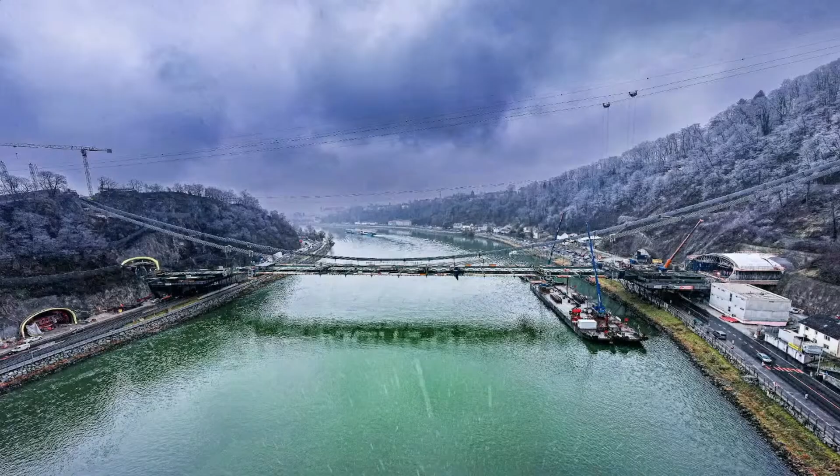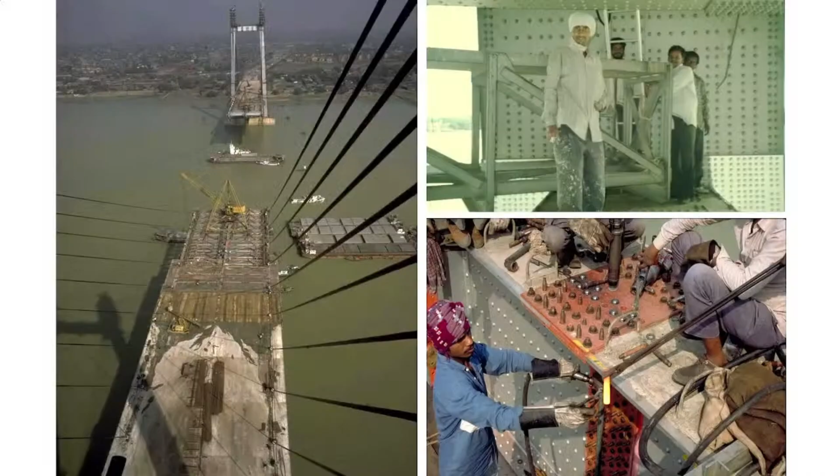Anyways, just to give you some ideas - one of the real roots of our office is actually in India. Perhaps you know this bridge, I've talked about it before. This is the second Hooghly Bridge in Kolkata, the Vidyasagar Setu, designed in the 80s, and at that time it was the longest cable-stayed bridge in the world. It took a long time to build. By the time it was built, it was not the longest anymore, but it was the first cable-stayed bridge with a composite deck. It showed the power of composite sections, and it was built with local material, indigenously, because at that time there was not really weldable steel in Kolkata. There was not a lot of experience with high-strength friction grip bolts, but there was experience with riveting. So the entire bridge was built - it's a world record long-span composite deck cable-stayed bridge, and all riveted. This is possible with local people, local workforce, local material, and local construction methods.

Is there a pointer here? I don't know how the pointer works here. But anyways, you can see it. No, I wanted a pointer that I can use. No, don't worry, let me go back.

Here we go - so this is local materials and riveting. I think we as engineers have to be flexible and find out what is available and what can be done. Riveting is actually a very good way of connecting steel, even though today it's perhaps too expensive. The bridge is still standing, and it shows how slender cable-stayed bridges can be, how resource-saving they can be. It's a 450-meter deck with only a 1.50 meter height.

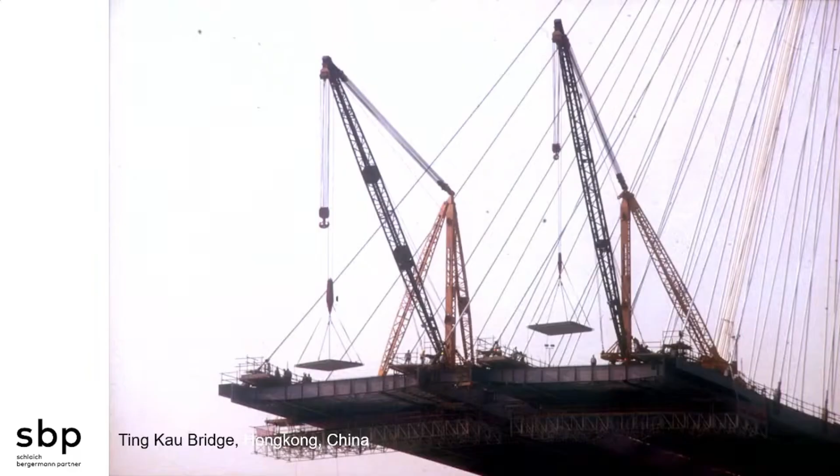This bridge again is done with composite deck. It's one of the few multi-span cable-stayed bridges, with a 450 meter span and about 1.50 meter deck height. The difference from the bridge we saw before is that here we worked with precast concrete slabs. You see a steel grid, and on the steel grid there's a concrete slab. I think this is a very fast way of building such bridges because the steel grids are comparatively light. They can be prefabricated and put on site very quickly, and then you have the sheltering concrete slab that protects the steelwork and takes the horizontal cable forces very nicely. But if you work with in situ concrete, these horizontal cable forces on the young concrete cause a lot of creep, and this creep then overloads the steel very easily. So for the next bridge we chose prefabricated concrete panels, because they're older, so there's less creep and less loading on the steel.

So this is the example of the Hong Kong bridge, and because it's a multi-span bridge, you can see you have to stabilize the main pylon. Therefore there are these longitudinal stabilizing cables, because the central mast has no backstays, and usually cable-stayed bridges do have these backstays, and they need them.

Then this story continues. We came back to India. Perhaps you know this bridge, the Signature Bridge in New Delhi, which is called that because at the time the chief minister wanted an icon, a signature bridge. When I hear this word, I get goosebumps, because usually I'm trained to do good bridges, not crazy stuff, and 'signature' always sounds a bit like crazy stuff.

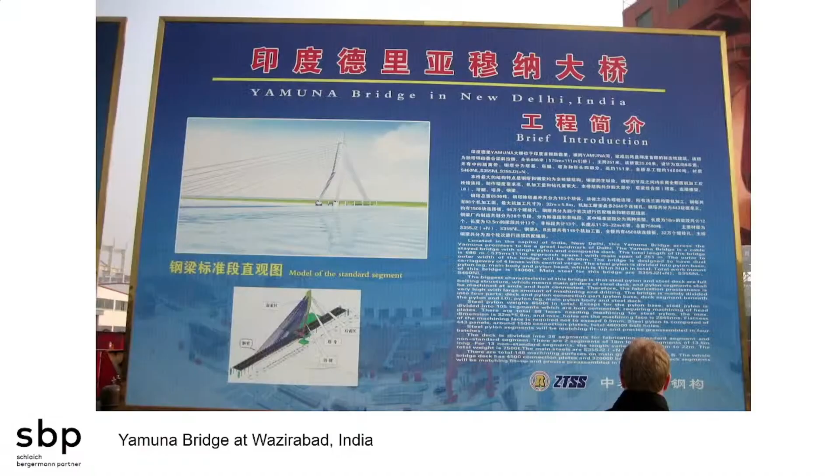I'll give you one example of what that means. If we look at the connection where the mast meets the deck, this is a rather big element that needed to be prefabricated, meaning you have to move 400 tons of steel halfway around the globe. So this was prefabricated around Shanghai, plates welded together, and then you see the little holes bolted to longitudinal and transverse girders. It had to be coated, and they had to bring it from Shanghai all the way to New Delhi.

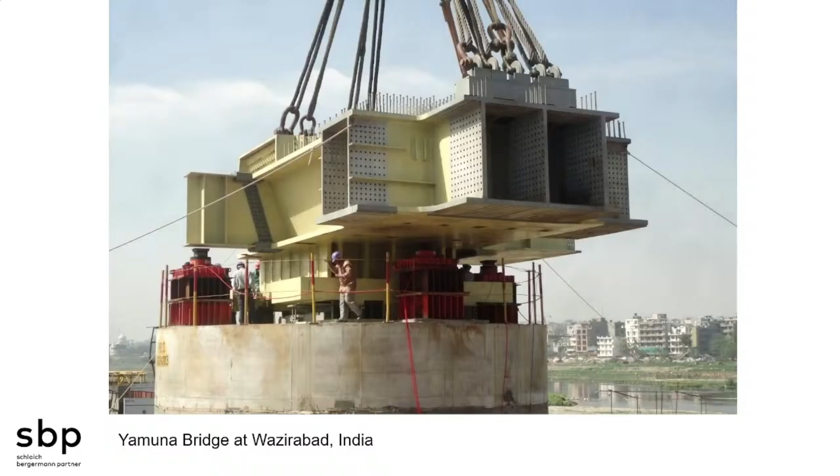You see this plate here, a 250 millimeter plate. We thought that was not possible. We had designed it with lots of 50 millimeter plates, but the Chinese said no problem, we can weld 250 millimeter steel plates. So the choice of material also has to do with the dimension of the materials. What can you actually do? What can you weld? What can you connect? What can you transport? This is just this little piece here.

And the entire bridge was then built together like that. Because think, if you see such a mast, such a pylon, how would you construct it? What's the structural detail behind it? Is it hollow with load-bearing outer walls, or is there a structure inside? If you look at the Statue of Liberty, which was actually designed by Eiffel of the Eiffel Tower, the Statue of Liberty is a steel truss, only covered by non-load-bearing steel plates.

And here it's the other way around. What you see is load-bearing - this is material decisions and structural decisions. Does the material I have, is it able to carry the loads? And then you see these horizontal lines, almost horizontal lines - this is where individual elements were connected. It's basically a big Lego thing, large elements were bolted together. You see the last one on top, so this would be the size of one of these elements.

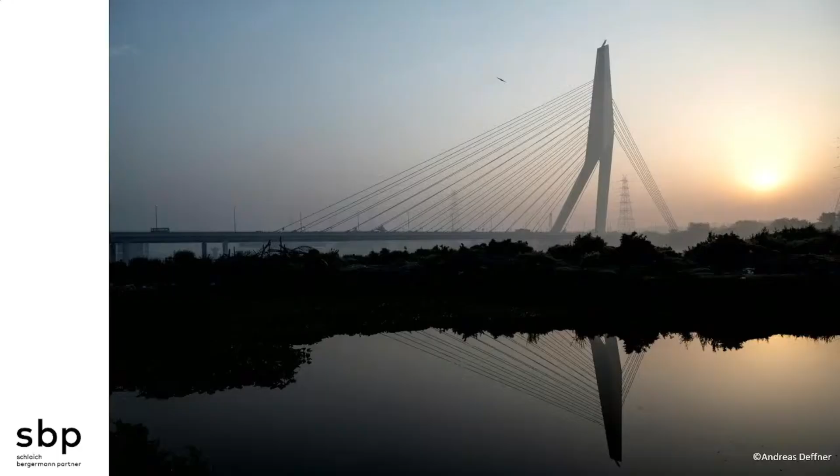So the bridge is standing nicely, it's fulfilling its task as far as traffic goes. But it's a bit strange - why have a 250-meter, one single pylon cable-stayed bridge in such an area where there's no water really? Because this is basically a 500-meter bridge as if it had two masts.

So the initial idea was that all this would be somehow dammed, that there was a lake, a huge lake, and that would become a big park with a lake. So they call it signature bridge, and whenever I'm in New Delhi, I say yes, but the signature was the promise to make a park, and you have not really fulfilled your promise yet, because this bridge only makes sense if there's a lake and a big park. So I really hope that one day this bridge will get its lake and make sense really.

But it's a nice composite deck, and it really relieves traffic in New Delhi. Not all bridges need to be with composite decks, obviously.

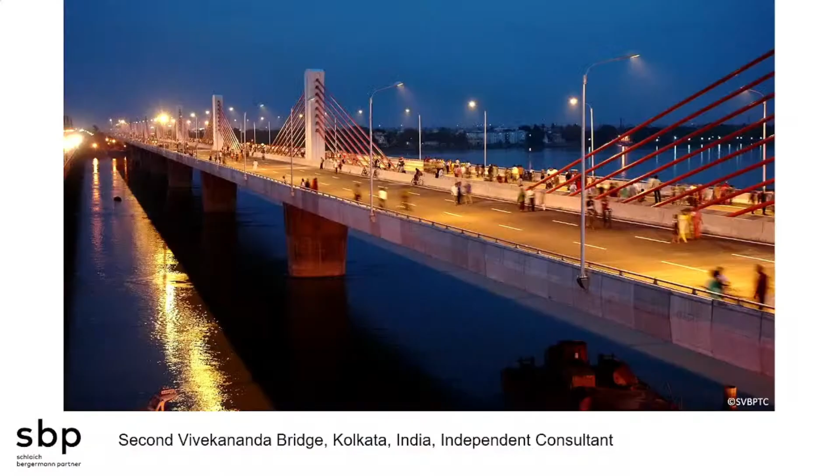And here this is an example of an all-concrete bridge, the multi-span extradosed bridge, the second Vivekananda bridge in Kolkata, designed by Parsons and IBT, together with CES, built by L&T - all these abbreviations.

I found it very interesting to understand how extradosed bridges work, because I come from the field of cable-stayed bridges, and if you see such a bridge as a cable-stayed guy, you say that makes no sense at all. These very low pylons, these very inclined cables, the forces in the cables are way too high. Why do you make such a high deck if you could make it as slender as we have seen before? The backstays are missing, and this is all crazy.

It makes no sense - but they are not cable-stayed bridges, and this is why they do make sense for spans between, say, 100 and 200 meters. Basically, they are only box girder bridges where the pre-tensioning or post-tensioning has somehow grown out at the supports. And since the cables are very shallow, the masts are very low, they work mainly to carry dead load, also because there's no backstays. The masts are comparatively flexible, and since the deck is very heavy, the deck is basically taking all the live load. So these cables that you see, they are mainly for dead load.

They're basically nothing but post-tensioning, so the load-bearing behavior is completely different. And since they are mainly for dead load and don't get big stress changes because of live load, there's less fatigue problems. And if there's less fatigue problems, you can use cheaper steel and cheaper anchorages. Therefore, extradosed bridges are very, very attractive, very economic for smaller spans.

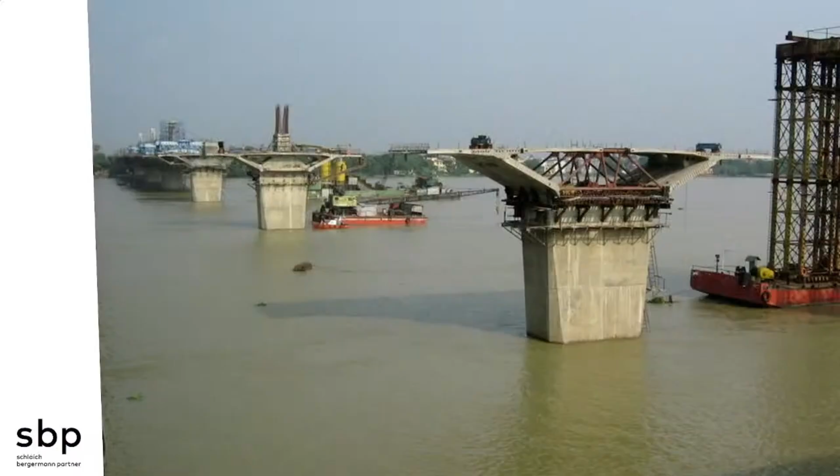So this is what I learned on site. We were the independent consultants, and I learned so much about extradosed bridges, especially in India with all these well foundations. Well foundations are another very Indian thing - you have these big rivers and the scour and the sand, and that all calls for these well and caisson foundations that you would not use so often in other parts of the world.

So the well foundations cannot be seen, they are down here, up to 50 meters. Then you have this concrete pier, and you see the first segment still in steel, again composite, steel and concrete. Then back there, you see it's all cast with concrete and all monolithic. So this is already an example of an integral bridge without bearings and joints, at least at the piers.

And this is one of the segments, D6 segments - D6 because it's 6 lanes. There's all kinds of shear keys to connect the deck segments. Here you see this hole where the cables are installed.

So, very typical, and something that you would not build in Germany, for example. In Germany, such bridges are not allowed because in Germany people say in these joints there's trouble. We have a lot of de-icing salt in Germany, and the salt water runs into the joints, and then you get corrosion in the pre-stressing. So in Germany, it would be very hard to build such a bridge, while in other parts of the world, you see them all the time.

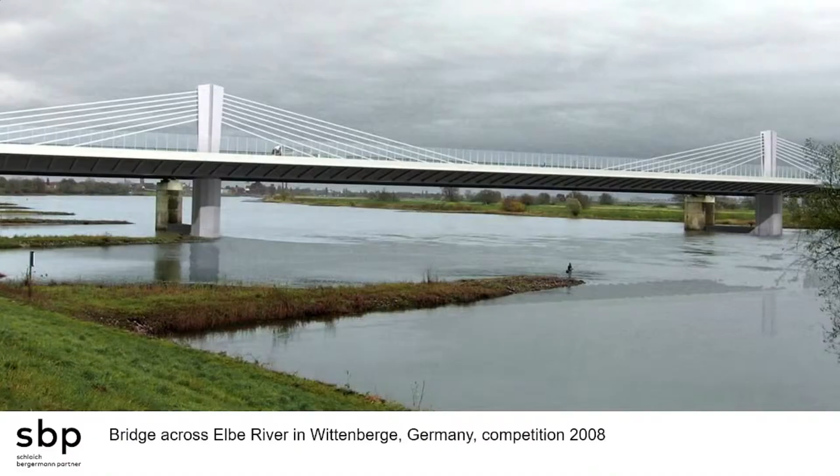Extradosed bridges are also something quite Indian. There's a lot of extradosed bridges here in India, while in Germany there's not so many yet. This was one proposal that we did for a German Autobahn highway, but it did not get built. Still, we got all the extradosed guys in the world, the ones that I know at least, together. There's Mr. Sankaralingam, whom you perhaps know from L&T, and at fib we wrote one of these fib books on extradosed bridges.

So we collected all the knowledge, that international knowledge that is available, in this book. Thank you very much.

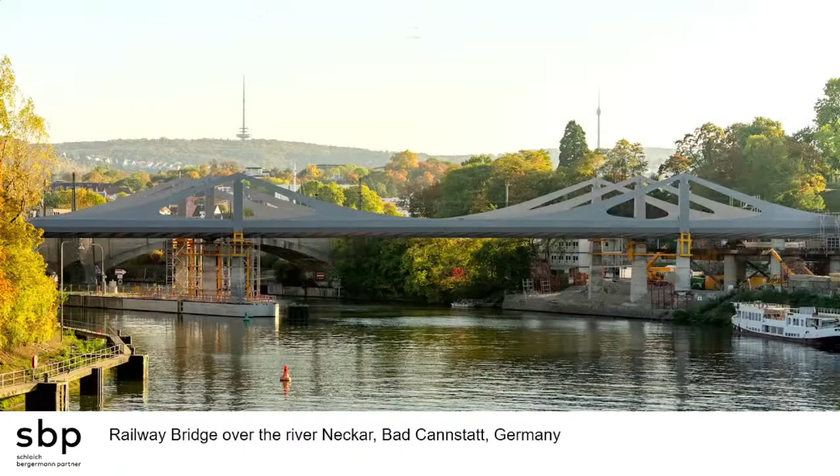So we have talked about cable stayed bridges and extradosed bridges and a little bit about the differences, but this doesn't necessarily have to be a steel cable. It can also be a steel plate. So this is a railway bridge in Stuttgart, Germany, that follows the same principle. You can call it an extradosed bridge, but rather than having expensive cables, it's just heavy steel plates that at the same time form a bit of acoustic protection.

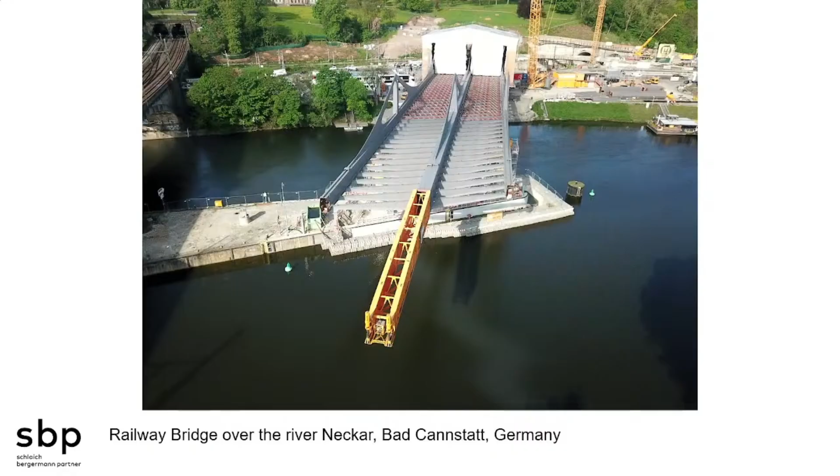And this bridge was just recently finished. It's again a composite deck. You see the tent back there. This is where the deck was prepared, pre-welded, and then it was pushed segment-wise across the river. And you see the longitudinal girders and the cross girders, and then the concrete was cast on top.

So even railroad bridges can be done this way. And underneath the deck, you see this hanging footbridge. So at the same time, it is protecting the pedestrians that at the same time cross the river Neckar in Germany.

This was the first part. How much time do I have left? You have about 10 minutes. 10 minutes, okay, then I have to speed up a little bit.

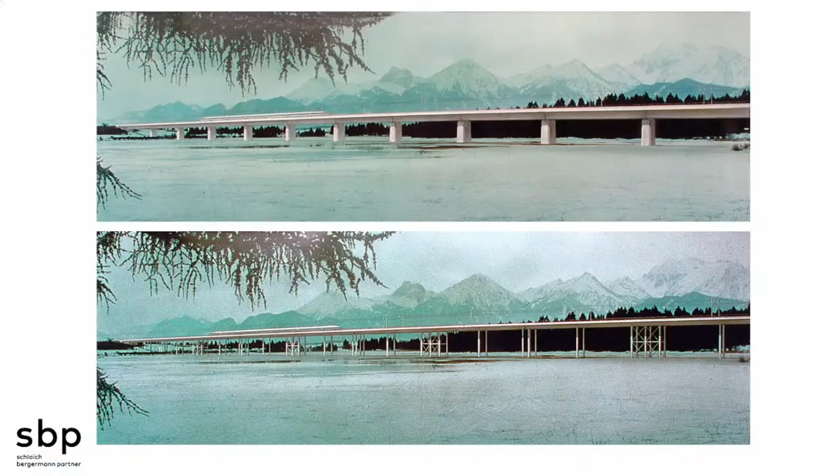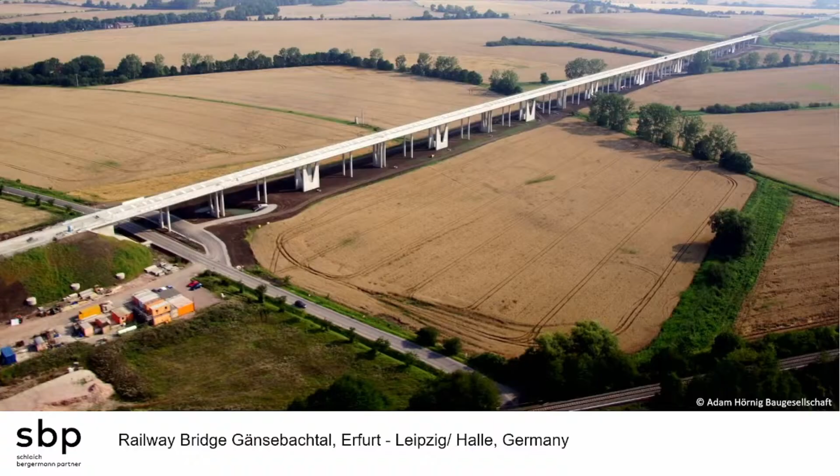So integral bridges. In Germany, usually you do bridges with lots of joints and lots of bearings, and already my father, whom you have met in the beginning, said, look, why not make integral bridges with very slender decks and very small spans. The smaller the span, the lower the loads. You can do it with very slender piers. And this is what we have actually designed for German railways. German railways is rather conservative, but they have accepted integral bridges. So here you see very slender piers, very slender support structures with the starter reinforcement, and everything was concreted together as an integral bridge. So no bearings, no joints, or very few joints, and that is, I think, a very elegant way of building robust and low maintenance bridges all over the world.

But in this case, yes, the movement goes all the way into the ground, so you have to also do pile-soil interaction. Calculation becomes very important.

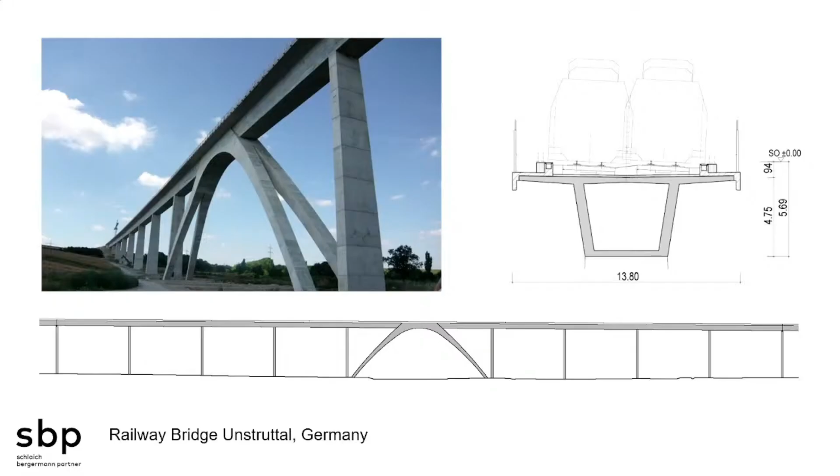And this is also my claim: you have to spend a lot of brain as an engineer, and the contractor and the client are the ones who save money, so they should pay us well. If you don't pay your engineer good fees, he has no time to do stuff like that.

So this is the bridge, and you see even at the joint there are no bearings, because there are two walls on the pier, and these walls are monolithically connected to the deck.

We applied the same system to highway bridges. You can see it's a very humble highway bridge, still small spans, only 1.20 meters height, and very slender piers of high strength concrete that can take care of all the movement. So this is a 600 to 700 meter integral bridge without any bearings or joints, and they are very cost efficient, because there are no expensive bearings and no expensive joints.

But yes, you have to sometimes construct the piers and stress them to the side, then cast the concrete, and then with time they go straight due to creep and shrinkage. You have to do some fancy construction acrobatics sometimes if you really want to do it successfully.

So you see how slender these piers are for a rather normal bridge, but the contractor saved a lot of money and the world saved a lot of resources.

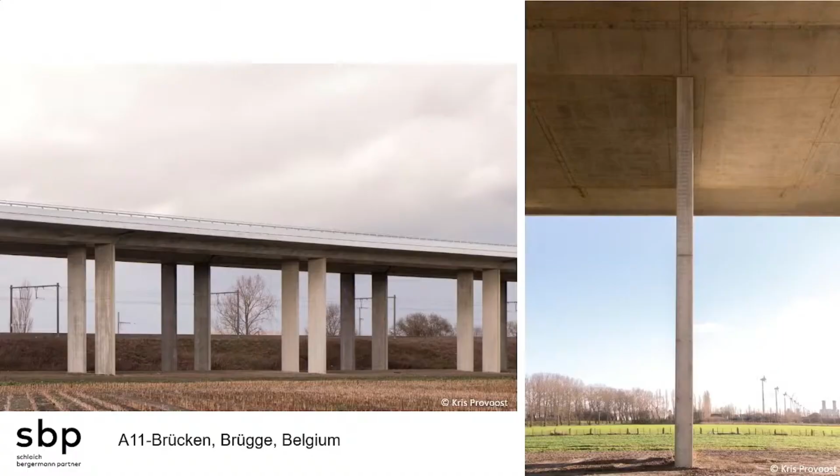So I had several PhD students working in the field of carbon fiber cables. We have developed anchorages for carbon fibers. I could talk for hours, but this is not the time right now. I'll just tell you, don't break them. Make sure that this brittle material doesn't break, because you end up with a lot of fibers and a lot of black powder after a big bang.

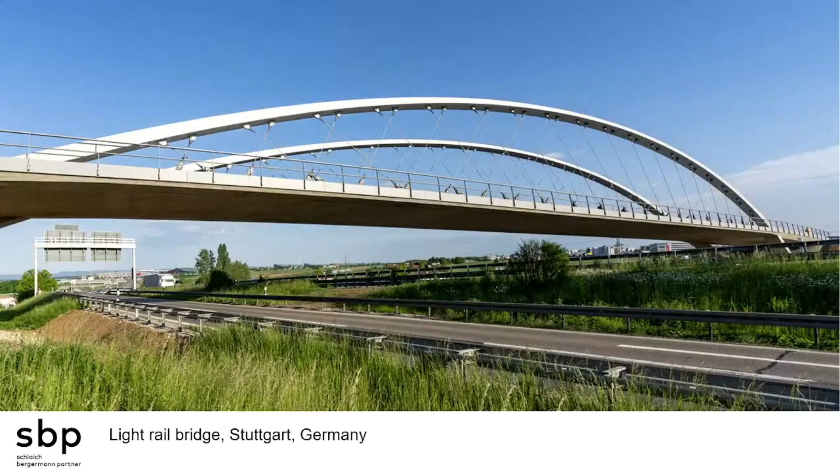But this research has led to bridges like that. This is a network arch bridge where you get a lot of stress changes due to live load, and if you would make the hangers in steel, they would have big diameters because of fatigue design, while with carbon fiber you can end up with very slender hangers.

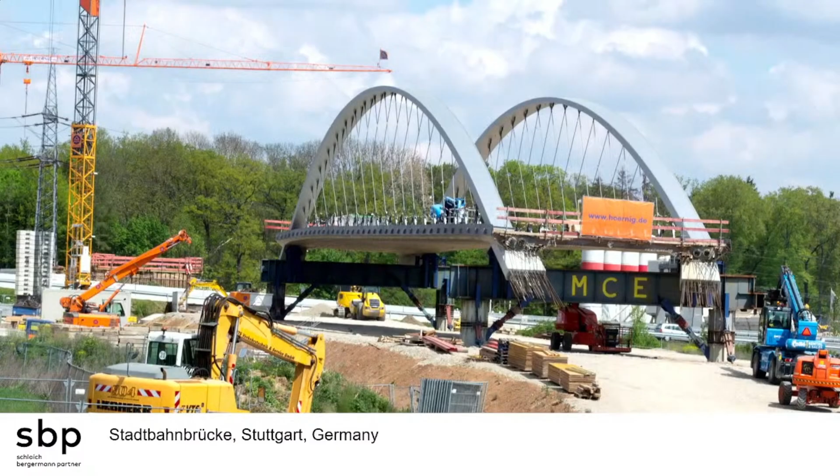As you can see here, the entire bridge was prefabricated. This is the carbon fiber anchorages, and here you can see how slender these hangers are in carbon fiber.

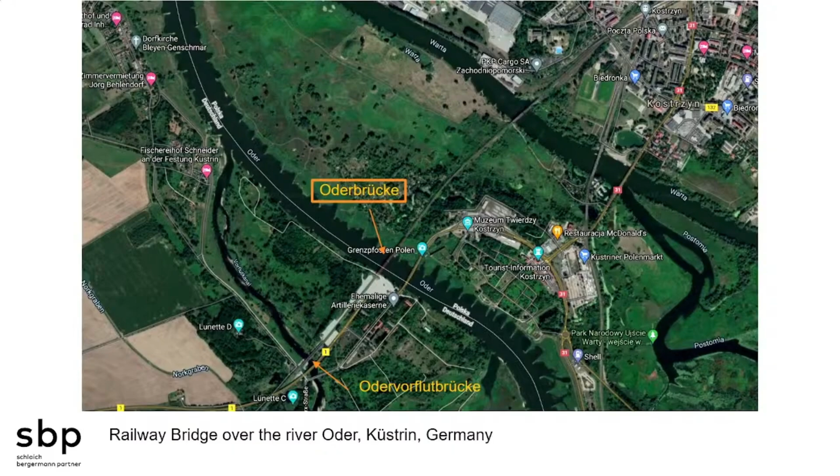There's another bridge I quickly want to show you. This is the Oder, a river between Germany and Poland, and German railways again allowed the change from the heavy steel hangers to the lightweight carbon fiber hangers, because it meant lots of savings for them.

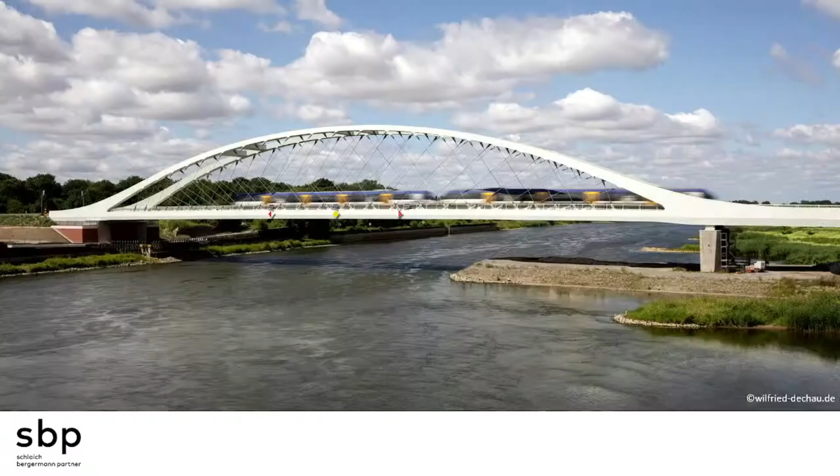So this is another railway bridge where the bridge is pushed in and eventually goes 120 meters across this river. So you see how slender the hangers are.

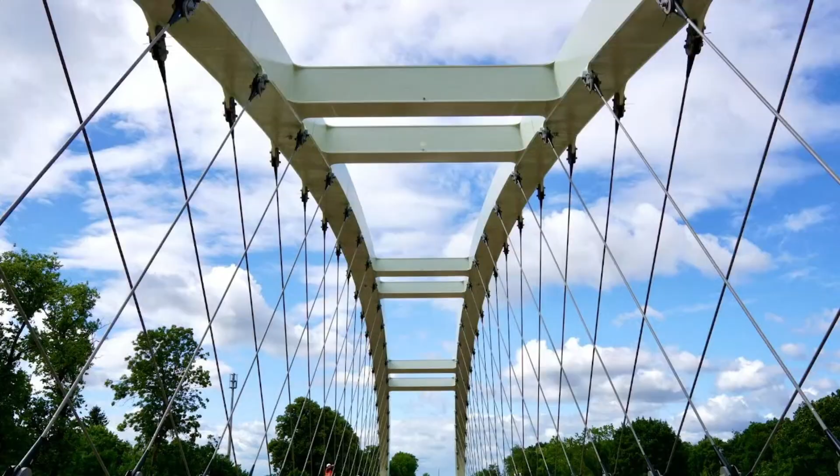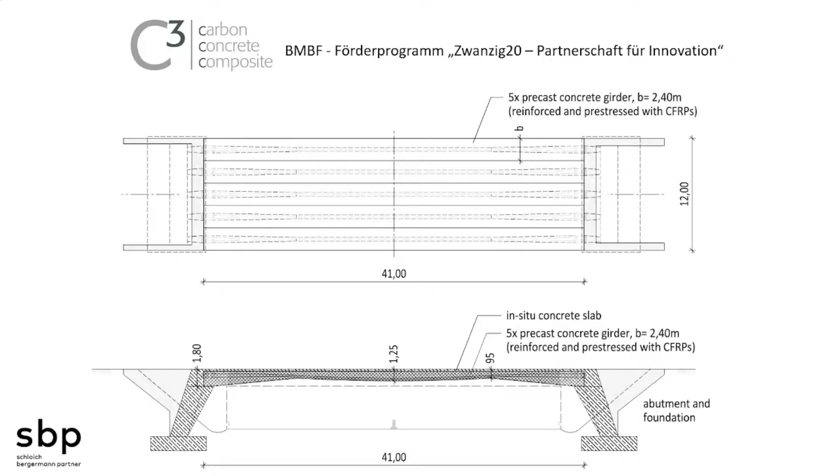We have developed now pre-stressing systems for concrete girders. We want to do bridges that consist of individual carbon fiber pre-stressed girders that are cast into the abutment, and we have done tests now.

Then with a shaker on top, we did 2 million cycles, and we found out there are no fatigue issues in carbon fiber. And we are now trying to do this with small elements.

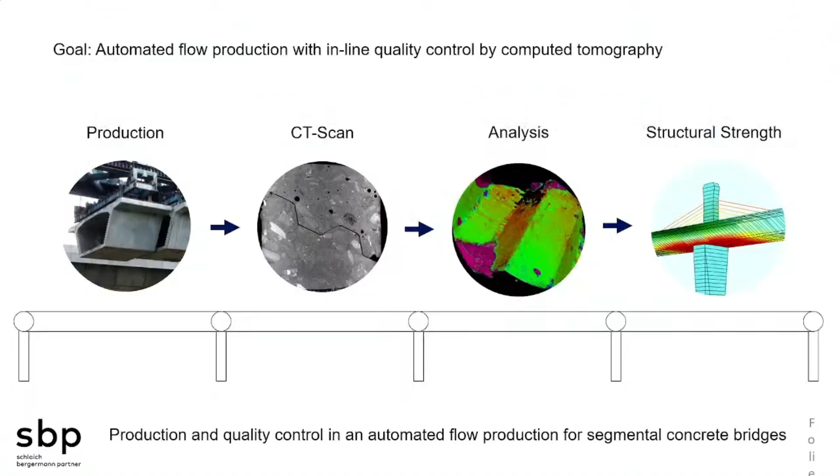We do computed tomography to see what the joints say to that. If you do computed tomography, you see all the little cracks in the concrete. We can check the surface and how the surfaces are connected. And we've actually built a small test bridge.

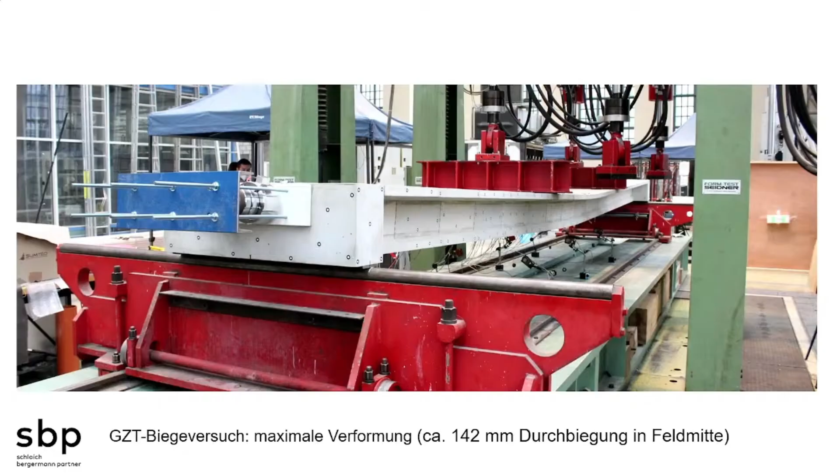You see these small precast elements, and they're stressed together with carbon fiber. We could prove that these carbon fiber pre-stressed bridges work very well. So you see the carbon fiber strands here, pre-stressed together of lots of little elements. And I see a lot of future in the field of carbon fiber pre-stressing also.

So this was a quick run through the world of composite decks, integral bridges, carbon fiber, India, Germany, and I hope this entertained you a little bit and inspired you to think about materials and structures. Thank you very much.

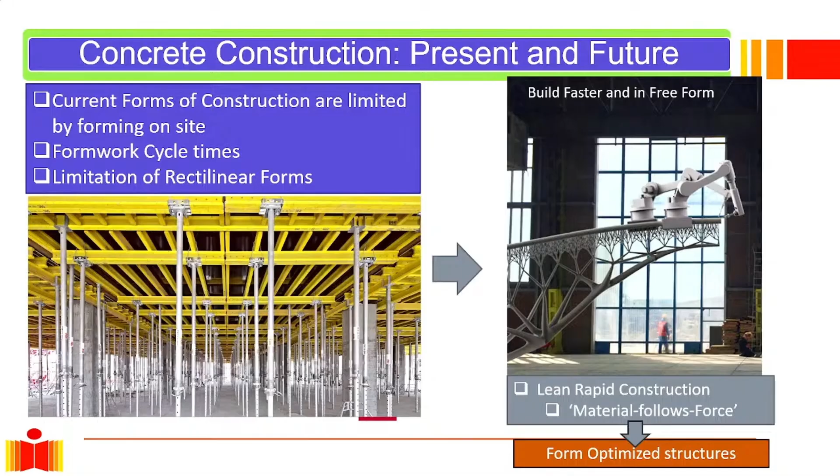Well, that's a far ways away, but the whole point is that we want to use this concept of rapid, lean construction using form-optimized structures which are possible. Now, if you look at that particular shape printed out there, that would be the shape of a bridge that comes out of a process called topology optimization, where you optimize the structure, take away material where it's not required, and you end up with something like that. Except printing something like that in reality is still farther away.

We have certain constraints. What are the constraints we are currently dealing with in this form of printing? What we are currently working on is layered printing. We assemble a structure in layers. Now, one of the fundamental challenges there is the development of the structural form itself.

I can develop all the technology that I want, but if I don't assemble these extruded filaments in a structural form, then I've not achieved anything. I can build walls all I want, but those are simply walls. Can I use this structural form to use the material efficiently? That's the first challenge we're facing.

Integration of reinforcement still remains a very big challenge. The determination of structural performance—in fact, I was presenting on this yesterday—how do you determine the material property? I'll show you a little later.

There is no unique material property in this layered assembly. When you talk about compressive strength, it varies with the direction. And the second thing is, how do I translate what I measure from a small cube or a cylinder to project and predict the behavior of a structure? We are still far away from there.

We are still not at a point where, if you give me the material properties, I can tell you how the structure would behave, particularly for these layered assemblies.

And continuity in the structures—when you're talking about concrete structures, or steel structures for that matter, continuity, the flow of forces, transfer of stresses is very, very important. So we have to visualize the flow of forces, the stress paths, and make sure the material is adequate to withstand the stresses.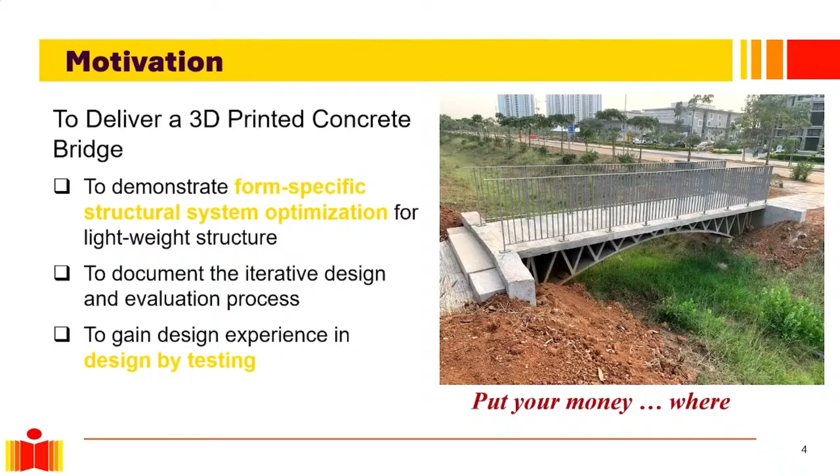That is the bridge that is installed on our campus. It is designed as a pedestrian bridge. Although when we tested for load capacity, it has significantly higher load capacity. It could very well pass—it could certainly take regular traffic for a 7.5 meter bridge.

So now, when it comes to developing the printed bridge, we have to assemble filaments. So basically, what comes out of the printer is a filament—an extruded filament of concrete that you deposit to create a contour. You assemble several contours in multiple layers, and you create a structure. That's how the structure is built.

Now, the first thing we had to do was develop the material that would withstand the rigors of printing. I will not get into details, particularly dealing with printability and buildability. There's a lot of material processing that happens, development of the material itself, that makes it suitable for printing. I'll not talk about that here.

Then, of course, the form-optimized structural system—that's something I'll present here in detail—and the construction methodology and field erection. Early on, we decided that we were going to do off-site printing. So it's essentially like precast, except we print the bridge segments and integrate them on-site. That was the idea of the bridge.

Then, of course, we're going to field test it and calibrate our numerical model, which should give us some sense of confidence if we're going to predict, and then do a field deployment.

The printing system itself is a custom engineered printing system that we developed. It's different from most commercially available systems in that it's a direct deposition system. We have a custom engineered pressure control pump with a PLC controller, which allows us to control the output at the pump. We do not have an additional compactor that's available in most printing systems. The material directly flows from the pump to the nozzle. The nozzle itself is a commercial make. It's an ABB robotic arm, and it helps position and deposit the material along the contour.

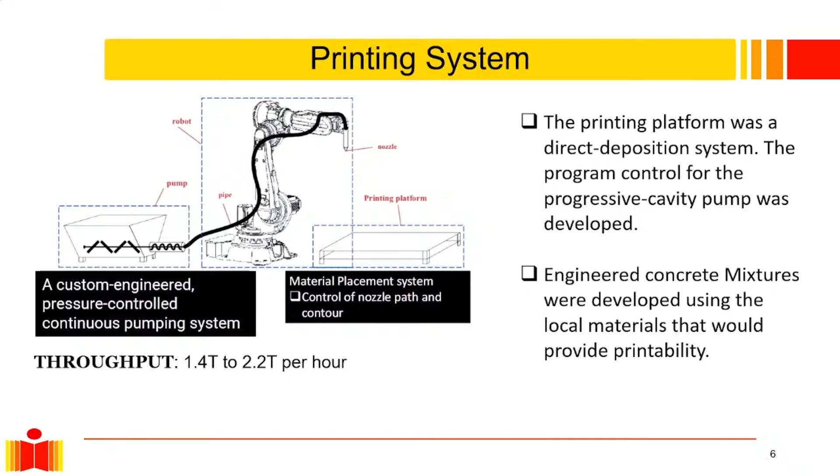So this is the system we have developed, and with this we are able to print concrete with about 6 millimeter sized aggregate, which for those working in concrete perhaps seems not significant, but in the printing community that's considered pretty much the cutting edge.

Now this is what you get from the material—this is the extruded material, and there is the print direction. When talking about printed material, you have to be wary of the fact that you have to align the physical dimensions with the material directions. You always have to align yourself with the material direction, because the material is extruded in a certain direction and then assembled in the form of layers. So typically we assign the print direction and the two orthogonal directions.

When you actually test this material—this is the material we had extruded—this is what we got as strength. You see that the strength in the three material directions is different. Not just that, you also get a lot of variability, and there are reasons for that. But the anisotropy is evident. You basically have a transversely isotropic behavior, or perhaps even an orthotropic behavior.

Now this gets us out of our comfort zone, because everything we do with concrete design, we treat as an isotropic homogeneous material—meaning it behaves the same in all directions and at all locations. That's not true here. You have layers separated by interfaces, which creates anisotropy, and that is reflected in the material properties. So if I was to design with this, which material property do I use?

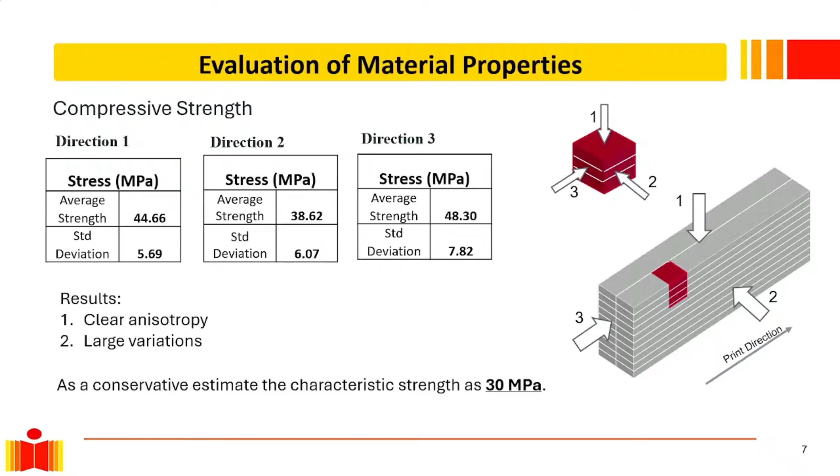Being good engineers, here's what we did: we chose the weakest direction, direction 2, and applied 1.65 times the standard deviation, moving away from there to define a characteristic strength that comes out to 30 MPa. We thought we can't go wrong. So that's the compressive strength of our printed filaments, and that's what we're going to use and proceed with in our design.

Now the next thing is reinforcement. Initially we thought, how do you put reinforcement in? If the whole process of depositing concrete is automatic, then maybe we should also put steel in an automatic manner. So the simplest thing we could think of was to essentially cheat, and that was to put a steel wire between the filaments. Each filament is about 50 millimeters thick. We simply put a wire of steel there and print on top of that. There's nothing special done to bond the steel to the filaments—the bond develops as the concrete hardens. So we wanted to see how effective this is.

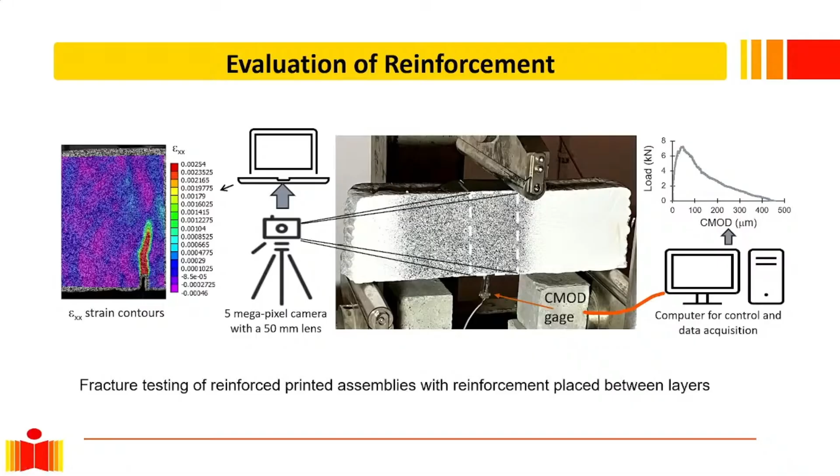We did some fracture tests on beams that are printed with the steel placed between two layers. Here you can see there's a notch, and the steel was placed at this level. We did the fracture test, and from it we extracted this—the load response that you get.

Not very encouraging, but there is still something we can salvage from here. If you look at the load response of this beam tested in fracture, load builds up to a high value, a crack forms, and you can see the progression of the crack. Then steel eventually does catch up, so the steel starts giving a response. Mind you, this is just a 3 millimeter steel wire simply placed between the two layers. I'm able to get some residual force transfer from this concrete by simply placing the steel between the layers.

We can do some fracture analysis, and from here we can extract what is called the cohesive stress - the residual stress that the steel bar is providing. If you see the orange line, that is the residual stress of concrete by itself as it's fracturing. The top, where the curve intersects the graph, the cohesive stress at zero crack opening, is the tensile strength. As you start opening the crack, for concrete the cohesive stress steadily decreases, comes down to zero. But when you put a steel bar in there, you get some residual stress from that tiny little steel bar sitting there.

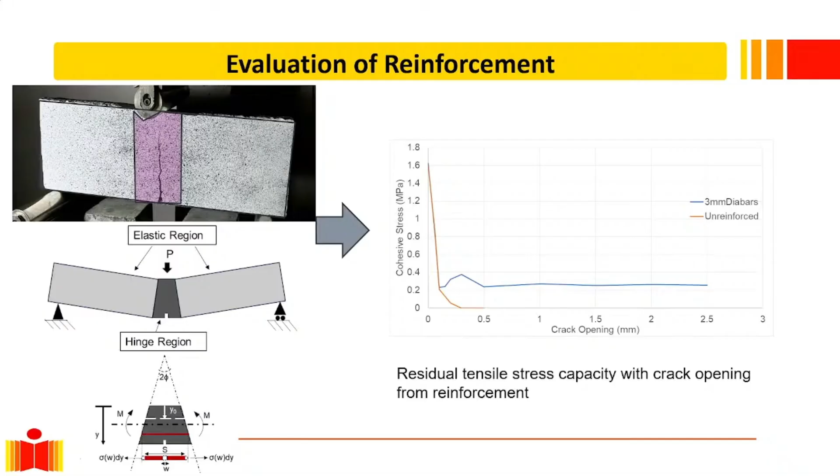I'll park this here. I'll show you that while it doesn't seem very significant, it actually plays a big role if you get your system, the configuration, correct. So next thing is development of the structural form.

Here's where we started working on the structural form - I'm showing you a scan of my notes as I was taking them during discussions about the structural form. The idea was to use the concept of a tied arch: concrete in compression, tied with a tension tie. You separate out compression and tension, use concrete to its advantage - we know it's strong in compression - and simply tie it with a tension tie, which could be a steel tie, basically just holding it together.

Within the compression arch, I still have to develop a compression form because I'm printing in filaments. That is the very first step we took at developing the structural form, where you have the filaments - each one of those green lines is a filament being printed. That was the grand concept for developing the structural system.

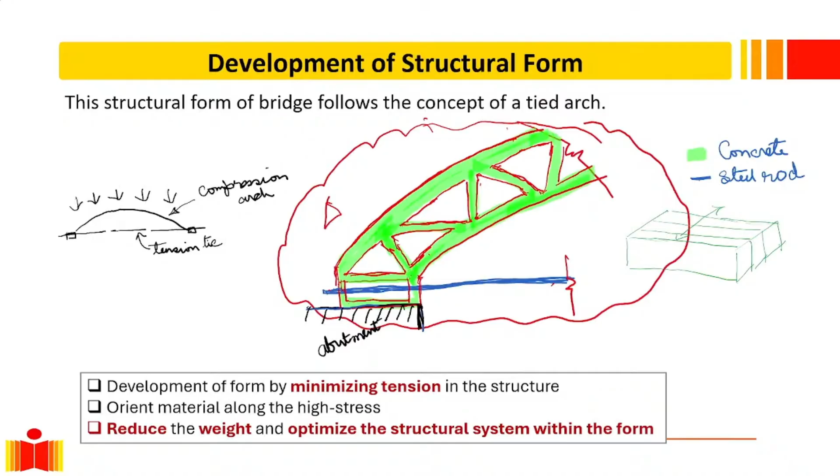The filaments are basically placed along those green lines shown there. As the printer runs along, the filament is deposited in the strongest direction - the strongest direction of the material is the direction in which it's extruded - and the material is placed along the members of that structural form. So by default, I'm using the strongest direction of the material oriented along where the stress is going to be highest. But we wanted to develop this further, and for this tied arch we're relying on this geometry-based development of stress.

If you take a beam and apply a uniform distributed load on it, you'd see from the stress contours that a compression arch forms on the top. Basically the entire compression goes onto the top, which can be carried by compression, and the bottom part of the beam would be in tension, which you can remove. That's where you put a tension tie.

Our whole concept was to look at the compression form, which is what we get from a stress analysis - this would be the concrete part - and then rely on steel to take the tension. It could be steel, or I could even put abutments and simply transfer the thrust onto the abutments, because all I need is something that takes care of the lateral thrust.

So we went about developing the structural form using the truss design from this stress trajectory. You do a stress analysis, identify all the stress trajectories. The compression form comes out as the outer boundary - the top surface and side surfaces - and the bottom parabola is basically what you get from the compression stress trajectories.

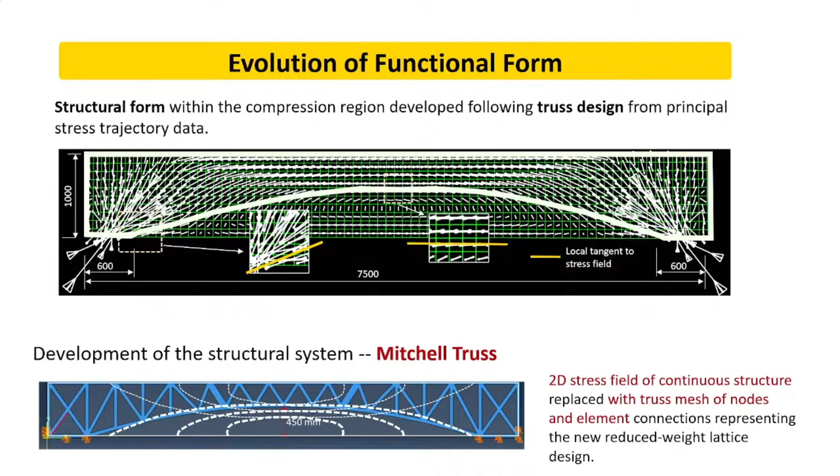Once you get the compression form, you can develop the structural system - a lattice grid of members inside that compression form - using the Mitchell truss theory. What you do is look at the continuous stress field and replace it with these lattice members, creating a structural system within the compression form. That is the process we followed. This is the first cut of a structural system we developed within that compression form - you have the top chord, the compression arch, and the two sides, and we've basically created a lattice inside there.

When you do the analysis of this lattice, shown at the bottom here, you see that the diagonal members alternate in compression and tension. That's expected when you have a lattice of diagonal members placed within the compression arch. The top chord actually does see some flexure, some bending happens there. So these are things we need to worry about when doing this.

Of course, the strongest direction of the material is oriented along the members, the filaments that form the structure. One problem with this geometry is that we have these 4-member and 5-member intersections. In concrete printing, within one layer you basically want a continuous print path, and when you have these 5-member intersections or members crossing each other, you do not get a continuous print path.

So the next step in the evolution was to go to a 2-piece bridge. Here, the diagonal members are essentially continuous. You do not have these 5-member intersections. If you look at the 2 pieces, the left and right, which would be printed separately, I could print each one layer in one continuous motion without having to lift the print head. So here I get print path continuity.

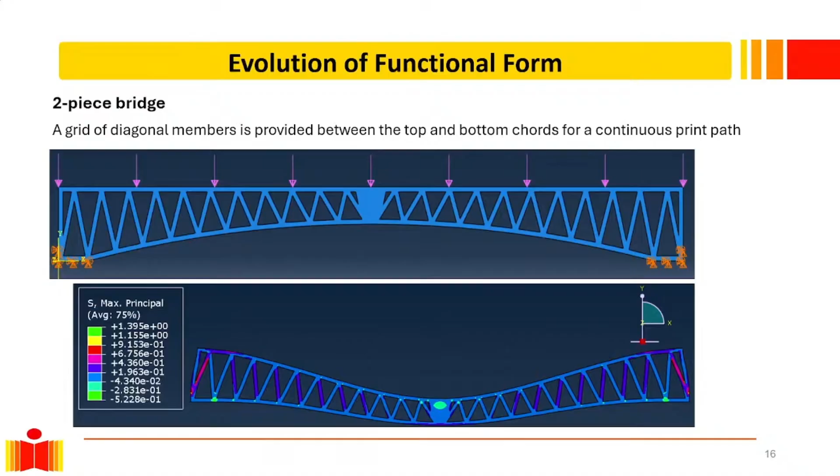We did the analysis, and from here, going back: if you look at the structural member arrangement, I have the diagonal members within the compression form, and the height of the arch. So I can play with the height of the arch. When I increase the height of the arch, I actually see that the stresses go down in the members.

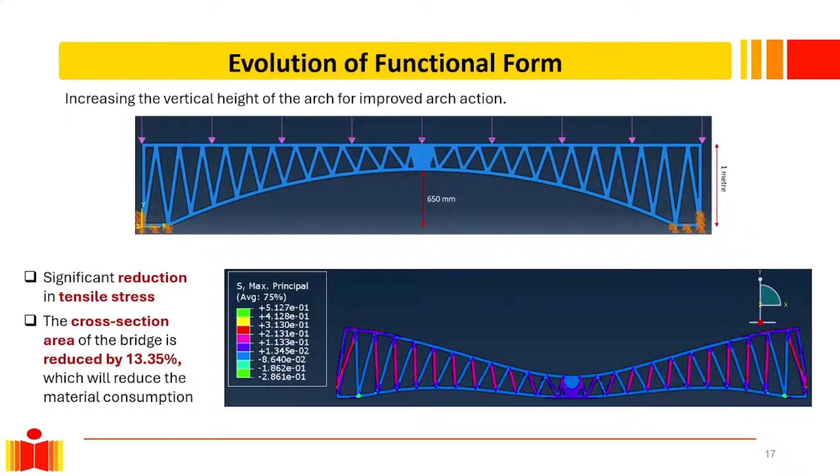If you look at this as a structural problem, what I have is a geometry I'm trying to optimize. The compression form is given by the stress trajectories. The top chord is fixed, the side face is fixed, the bottom arch comes from the stress trajectory, that part is fixed. Then I have these structural members, the lattice, which I can play with—I can increase or decrease the spacing of the nodes and create different structural forms within this compression form.

The other freedom I have is to play with the height of the arch, increasing or decreasing it. We did this process iteratively, went through several iterations, and ended up with a final configuration you see at the bottom here. The constraints were stress in the members—primarily tensile stress, minimizing the tensile stress in the member—and minimizing the deflection in the structure.

We were able to cut down the deflection, since significantly the self-weight of the structure contributes to the overall deflection. So when I take away material, I'm helping the structure by reducing the demands, which in turn reduces the stresses in the members. This is the final configuration we settled on, which gave us the best performance in terms of deflection and stress.

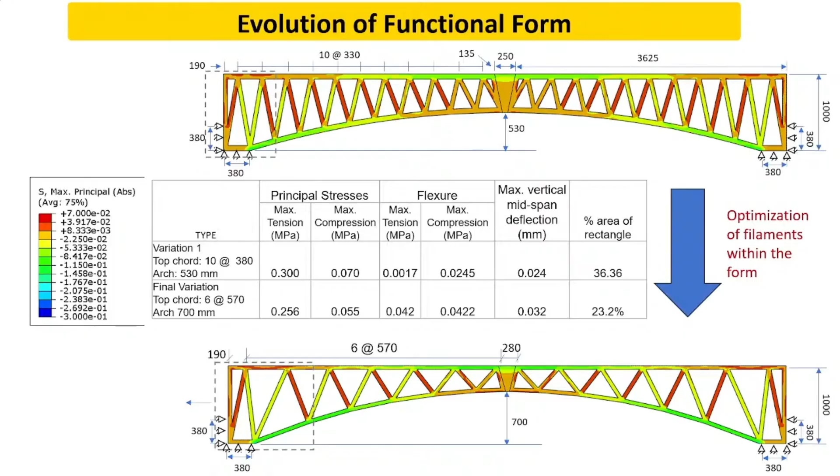From here, the next step was to actually print a prototype bridge and test it. The prototype bridge couldn't be a full 7.5 meters—it's a scaled down version, shrunk to a smaller 5.5 meter span. But when you shrink it, your print filament thickness still remains the same, so it's not exactly scaling, because the filament thickness is always fixed when I print it.

But my students didn't allow me to load the bridge further—they did not want us to damage it. They got really attached to the bridge, so we had to leave it at a certain point. I said linear calibration is good enough, and so my model effectively works from there.

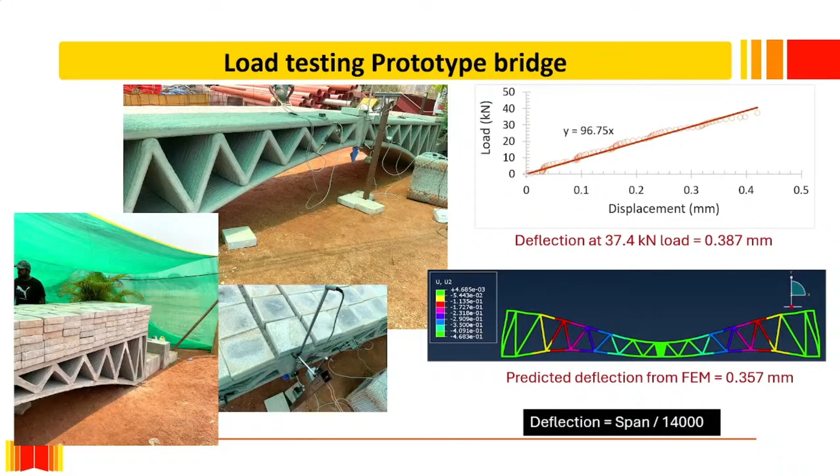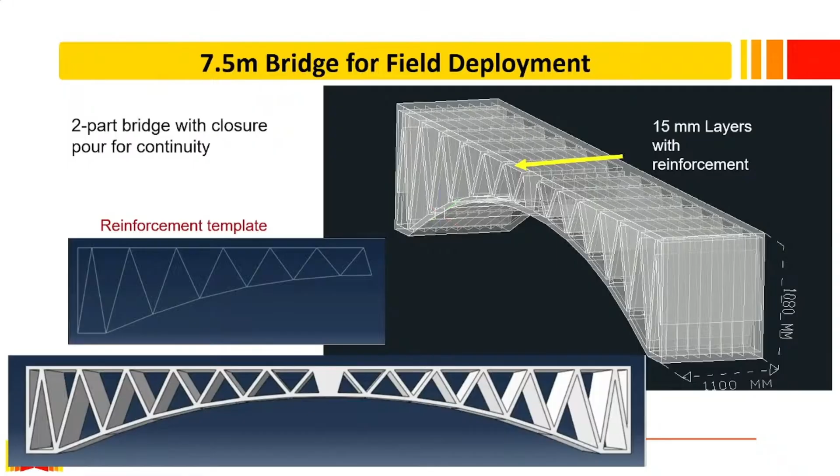Now, the next thing is to actually print the 7.5 meter bridge. We reinforced it using the same wire—this is the reinforcement template, again just doing what is expedient. We simply take a wire, bend it in this shape as a continuous filament, and after every 8 layers we would lower one of these steel wire templates, a continuous run of steel, placed between 2 filaments.

We already have the tensile response, the cohesive response that we got from the fracture test. So I do get some residual tension resistance from this steel template. Now, next was to simulate the response.

We're getting into predicting it using nonlinear finite elements, using concrete damage plasticity. A proper model was built, and the idea was to be able to predict the load capacity, how much this bridge could possibly take. Here again, we're cheating a little bit because we've only done the linear calibration, but we're pushing our simulations to see what load the bridge could actually take.

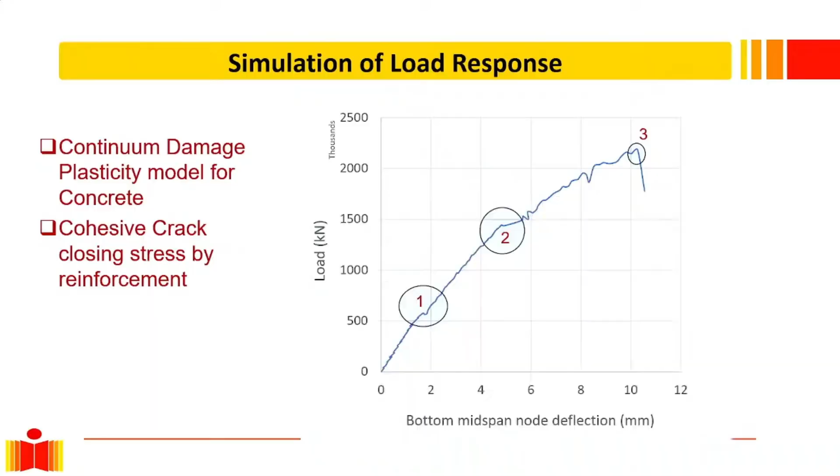Just to show you the sequence of damage, here is the tensile cracking at different points in the load response, and the final failure is because of compression damage in the strut. This is the final bridge that was installed. It is offsite printed, 2 segments with a closure pour.

This bridge has been designed as per standards as a pedestrian bridge, but of course our load analysis reveals that we could actually carry significant traffic loading if we had to. The few places that we kind of cheated: I don't know the fatigue response, and that becomes very critical, particularly for bridges. So we did what the code allows us to do, and that is to use a lower allowable stress in our design.

And remember, the compressive strength I'm using is already a low value, the lowest compressive strength of all 3 directions, while I'm loading the material in the strongest direction. So there is already an inherent factor of safety built in there. On top of that, we took further reductions.

So a quick review of lessons we learned from here. Basically, we can look at structural forms and 3D geometry for structural efficiency, and I can use printing to deliver those forms. The form can be optimized within a compression form, so use concrete where it is strong and develop a form within there. And I don't need a full rectangle to give you the full capacity - I can do with less. That is the whole point of this.

We are doing what is called form optimization and not topology optimization, because if I had turned it into a topology optimization exercise, that would be a glorious mathematical exercise, but I would end up with member sizes that are not uniform - all different sized members. But when I'm extruding, my extruded filament is always of a constant width. So this is one of the lessons we got from here - lessons specific to the project.

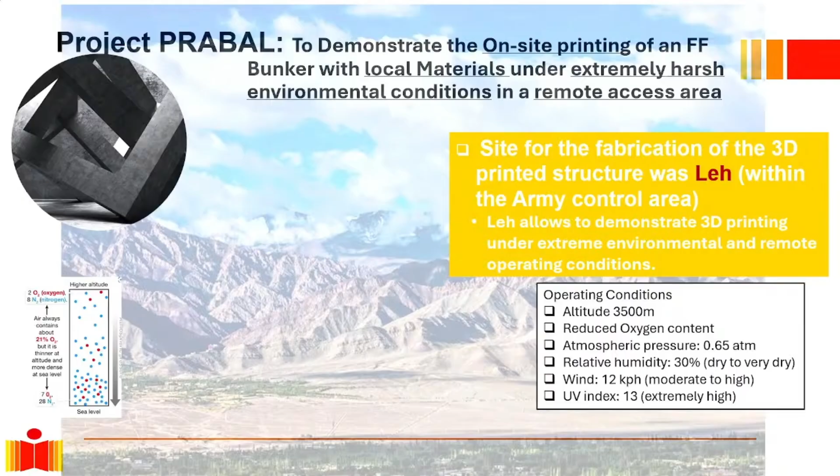Now, I'll quickly use two minutes to go over something else that we did. That is to demonstrate this form optimization further. We've actually developed printed on-site structures which are form optimized for a very high level of ballistic and blast protection, where you use the geometry to your advantage.

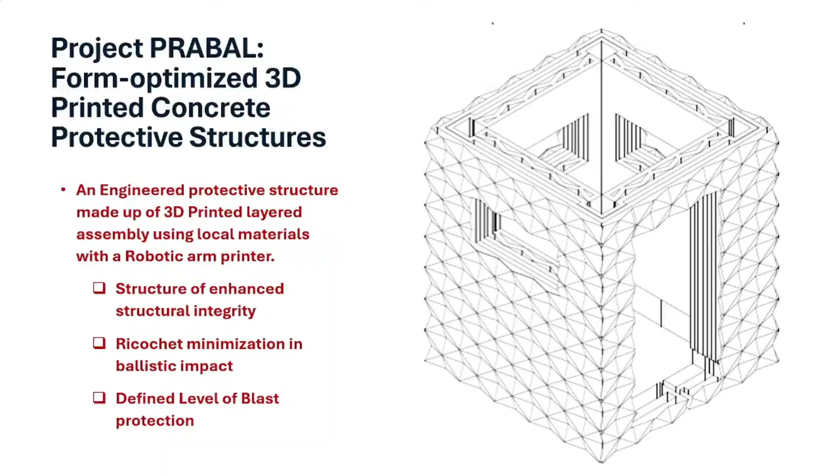This on-site printing was done in Leh at an altitude of about 3,500 meters, and this is a protective structure that was printed on site. The surface features you see are engineered to give a high level of ballistic protection. The shape itself has been optimized for a very high level of blast protection. And this is the bunker that was on-site printed.

And we're taking this further for geometry-based optimization for developing these subterranean protective structures, where we come up with this geometry which is eggshell shaped. Basically, the entire structure goes into compression. I can deliver this geometry by printing and use minimal amount of material and give you very high level of resistance in blast or for even overloads or just surcharge coming from traffic.

So these are the kind of structures that we're looking at, where I can use 3D concrete printing to deliver shapes which are not possible by regular construction or casting, where I'm using the material to its advantage in a form optimized manner. So with that, I'd like to thank you for your attention.

I know Venkatesh is getting a little anxious, so we'll be happy to take questions.

Thank you, Professor, for your excellent presentation, and this is very timely research.

Couple of practical questions from some problems I faced on 3D printed recycled plastic composite with the fiber along with that. If you see the physical form with the chord and the web for the truss, there is a bonding problem between the web and the chord. So testing with a small amount of load might not create shear over there, but when you did the finite element analysis and go beyond the particular elastic limit, then this shear failure could occur. And even for earthquake or any type of lateral loading, this area is really problematic. For my industry project, I'm really struggling to fix that and still continuing to work on this bonding between the different segments.

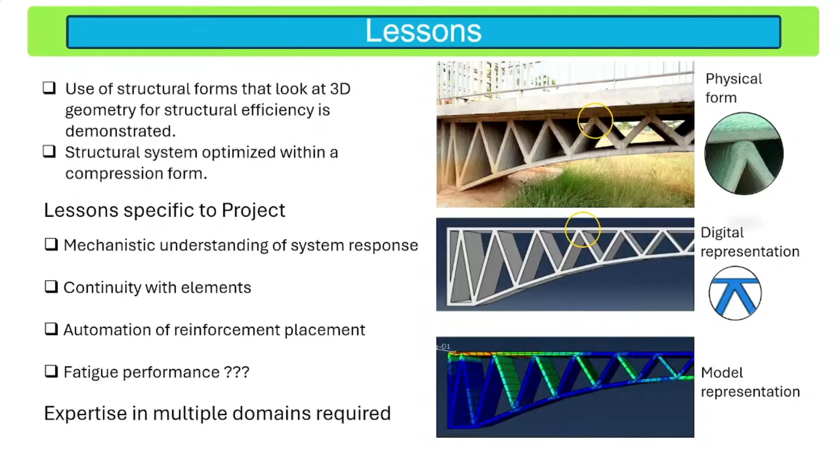Because during printing it takes time, we are not simultaneously printing all the chord at the same time, and then some part is curing and then coming back, and bonding issue is always there. So how might we solve this issue?

Thank you. No, that's a very legitimate concern. What we did was, if you look at the circle at the very top, you see the top filament and then you see the lattice, the diagonal lattice members. Now, during printing, depending on the precision you get, the contact between the members varies. So you really have to get your printing done properly, where the precision at that particular joint becomes very important.

What we have done is we have steel reinforcement that crosses over these two elements. If you look at my reinforcement template, it basically runs across the two diagonal members and goes into the top chord. So that gives me, it's almost like putting a shear stud across these two. What we've done is we've actually printed only these elements and tested them in different stress combinations, and we find that that joint, with that little bit of steel reinforcement going across, is able to transfer the stress and doesn't fail.

That we have seen, and I really don't need that to have a very high capacity. All it has to do is have enough capacity in bearing, which is a given, and shear. And that little bit of steel reinforcement in the form of a stud helps with this particular problem.

Sure. Let's go next. Keep your question to less than 20 seconds, quickly, so that we will have more questions.

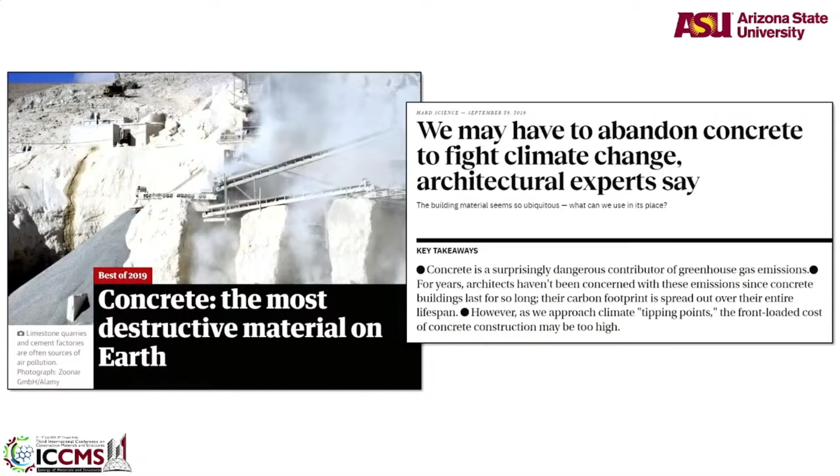India, China, Africa, all these countries need tremendous amounts of infrastructure. What other material will you use at this cost and this versatility that you can get? So the question in that newspaper article can spur a lot of thought. Can you do something else? But from somebody who is using concrete all the time, we should also think about, is there any merit in that argument that there is some destruction happening with concrete?

This is like statistics, right? You can show it in whichever way you want and convince yourself in whichever way you want. So I've heard people say that cement's carbon impact is about 8% of total global carbon impact, ranging from 4% to 16%, depending on who you talk to and what time of day it is and what they had for dinner.

So it's a very flexible argument. But if you look at facts, at embodied carbon dioxide versus embodied energy, concrete is actually one of the lowest carbon and lowest energy materials. The problem is the scale at which we use concrete, the quantum at which we use concrete. And therefore, if you have so much infrastructure and buildings to build, you pretty much are out of luck. If you look at cement, that's a little more, but if you go to other materials like plastics, aluminum, and bitumen, they have much higher carbon or energy impacts, but the volume of use is less. So again, there is a need to make concrete more carbon efficient if we still want to use the same amount or more of concrete.

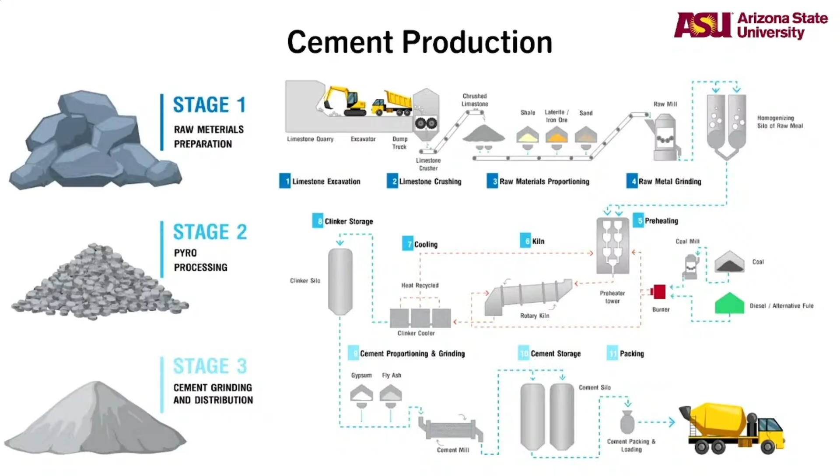So cement production, again, I'm not going to go through it, I'm preaching to the choir. You have to extract raw materials. They have to go through a whole sequence of grinding, crushing, pyroprocessing, packaging, transporting, and it adds up with respect to carbon impact. But if you look at where the most impact comes from, that's in this manufacturing step.

You take limestone, you heat limestone to 900 degrees Celsius to make it calcium oxide, and then you fuse the calcium oxide with silica and alumina to form what you get as clinker, and then you grind the clinker to get cement. That process of calcination, where you heat the raw materials and then fuse with silica and alumina, that's where the highest amount of carbon impact and energy impact are.

Now, the first question is chemistry is arresting us right there. Calcium carbonate, to become calcium oxide, you have to take carbon dioxide out. There is no other way, right? You are stuck with chemistry there.

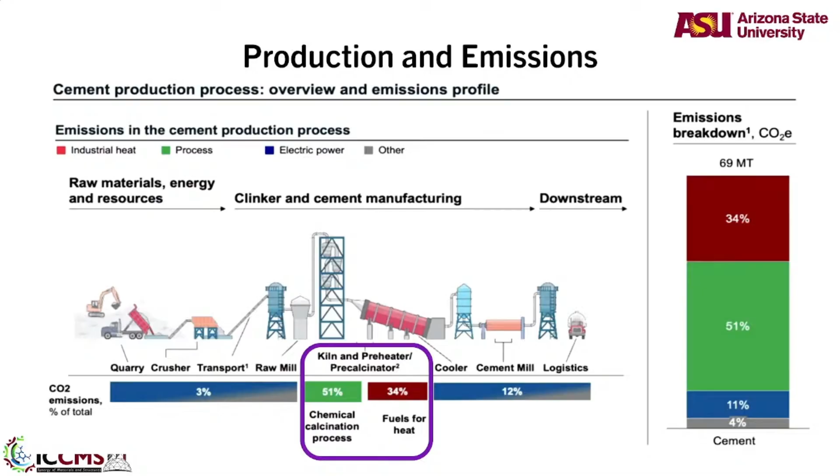Now, okay, then you say, I don't want calcium carbonate, I can use calcium silicate. You end up with another problem. We don't have as much calcium silicate as calcium carbonate, and calcium silicate transformation to calcium oxide to take the stable silica out is an even bigger problem. You have to do other methods, not just heating. So now you end up with difficulty in processes, you end up having to deal with that extra CO2.

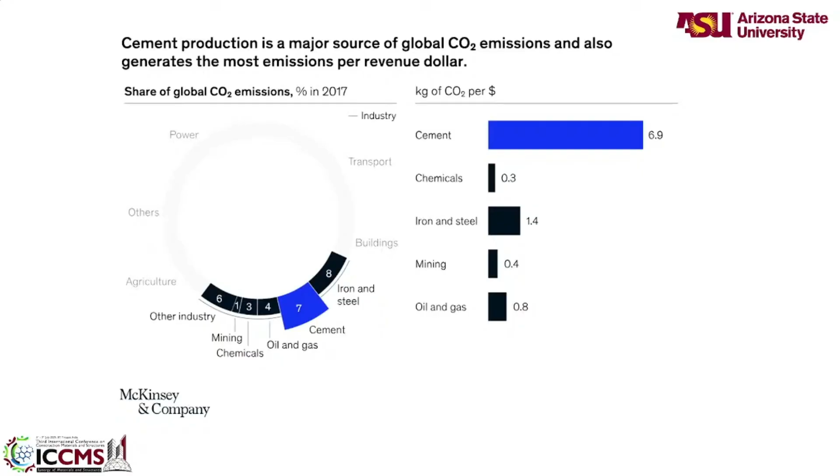I used to tell my students when I teach that you go to Lowe's, Home Depot, the big stores that sell cement and steel for home repair stuff, you can actually get a bag of cement sometimes cheaper than a bag of potting soil that you use for planting soils. It's so cheap, and that's because of the scale in which we produce cement.

So life cycle emissions: cement manufacturing and aggregate production account for close to 80% of life cycle emissions of cement and concrete. That's a fact that we have to live with. So the question is, how do we mitigate it?

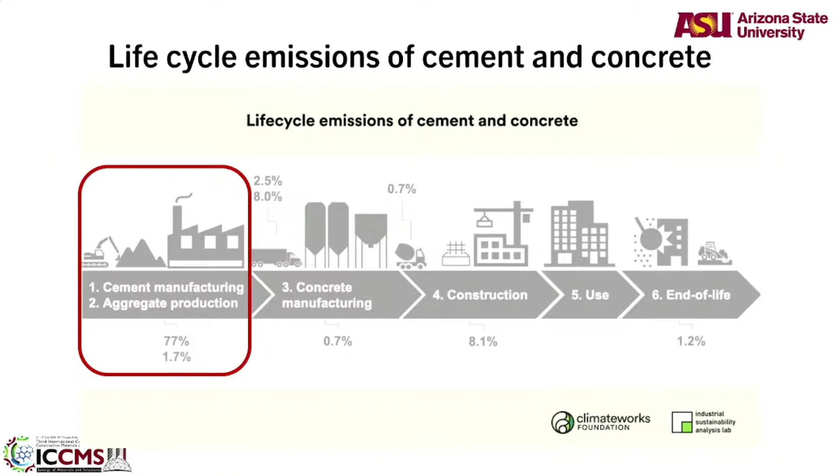This is from the US Department of Energy, typically a United States scenario. In India, it's slightly different. If you look at it, buildings constitute about 50% of consumption of cement, and all the other infrastructure constitutes the remaining 50%. India, probably buildings are 70-75%, infrastructure is 20-25%. In the US, most of cement production goes into infrastructure.

But again, US produces only 100 million tons out of the 4.5 billion tons of cement produced globally. We are only 4% of global cement production or consumption, and most of it goes to infrastructure, whereas in India the scale is going up. India is probably at about 150 to 250 million now, projected to go further up. So the scales will tilt in developing economies pretty fast.

And especially, like your director was talking about in the morning, 2047, Viksit Bharat, you need a lot of construction, a lot of infrastructure by 2047 to happen. This scale is going to tilt phenomenally, so the emissions will have to be curtailed.

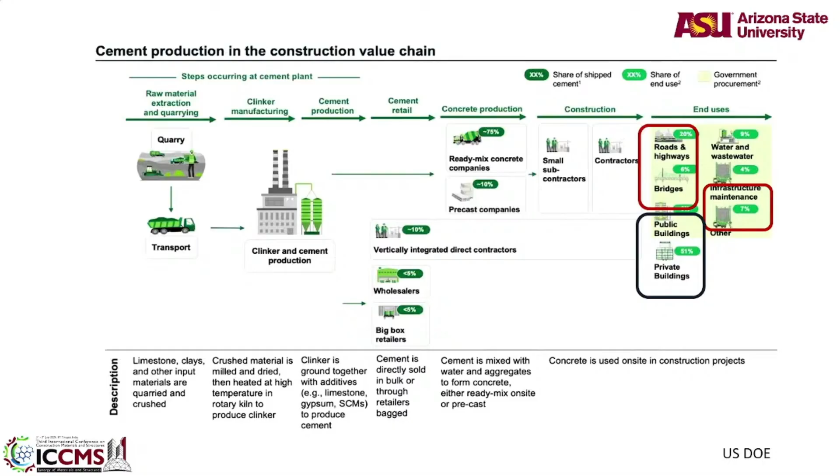So how do we mitigate? The first question that is asked, and the first answer you get from anybody who does cement, is use lots of waste materials, use SCMs, use less clinker, use all of these. Which is okay in a place like India where you have plenty of fly ash, plenty of SCMs. In the US, we are pretty much out of fly ash - really no fly ash is available, or very little, because coal power plants have been shut down.

Maybe coal is coming back in the US in the name of clean coal. We don't know what that is, but we are getting clean coal back. So maybe it'll turn, but right now we don't have coal, so we don't have fly ash.

The other thing we can do is find alternate process heat - don't use petroleum, don't use fossil fuels that create CO2, use something else to heat, use solar to heat. Think about getting solar to 1200, 1400 degrees Celsius. You can't even get your water heater to boil water with solar effectively, try getting it to 1200, 1400. Solar is a problem. There are methodologies to overcome that, but they're going to be very expensive solutions.

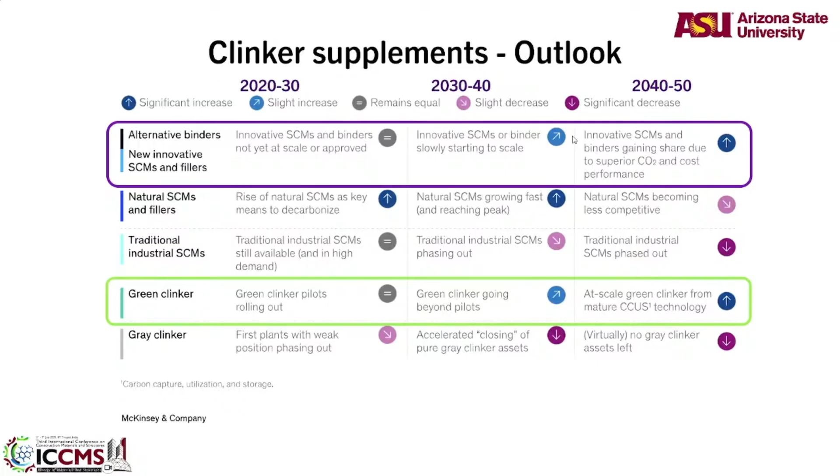Natural SCMs and fillers are becoming common. You can use aluminosilicates dug out of the earth. There's talk about gray clinker, phasing out old plants, with pure gray clinker assets being closed, which is happening a little in the US. There are very few pure OPC plants now. Everybody is moving into Portland limestone cements, PLCs, which are the precursor to limestone calcined clay cements, LC3, the natural SCMs. So there are lots of different movements in this scenario.

If you look at supply and demand side strategies, these are your conventional supply side strategies. You reduce your clinker to cement ratio, you reduce your clinker content. Indian cements are probably at about 0.85. US cements are about 0.82. Some European cements have a clinker to cement ratio of 0.7, but the global average still hovers around 0.8, clinker to cement ratio.

Electricity decarbonization is a total new policy decision. How do you go away from fossil fuels and come up with other ways of creating electricity? India is doing better with lots of hydroelectric projects and nuclear projects coming in. In the US, we've had no nuclear plants built in a long time. The closest we came was in 2011, and as clockwork, Fukushima struck and we stopped everything. So there's really no alternate energy sources coming up other than renewables, solar and wind, and geothermal for that matter.

Supply side strategies also include low carbon cement chemistries. If you keep a lookout, you'll see lots of different low carbon cement chemistries - calcium silicate cements, calcium aluminate cements, magnesium based cements. A lot of these low carbon cement chemistries are out there. Carbon capture and utilization, I won't go too much into it.

Then there's a bunch of material side demand side strategies, which you heard - optimization, like you saw in 3D printing just before - really a demand side strategy where you do material efficient design. You heard in the first talk on bridge design, where you can make it much more efficient through design strategies. Those are all demand side strategies.

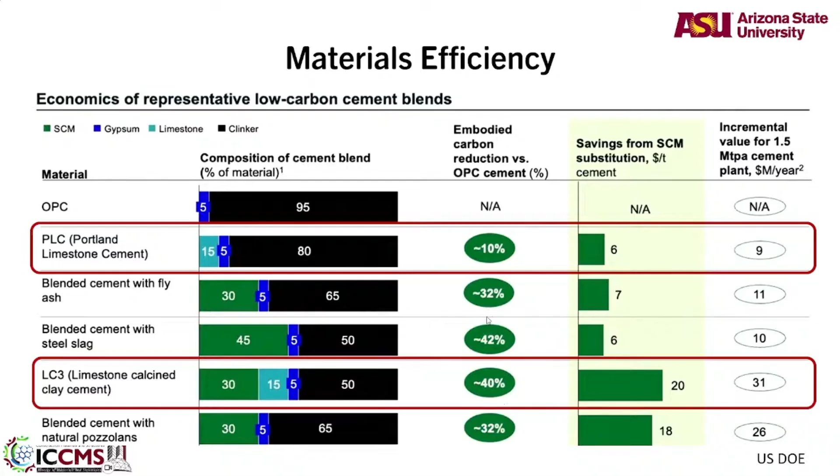So now the question is, how do we extend this further and how do we apply it? Let's talk about a few of these things. Portland limestone cements - the science has been proven for quite a long time. 10-15% limestone ground back into the cement so you can save that 15% clinker. Great strategy. A small amount of that limestone can react with the aluminates available to form mono- and hemicarbonates, in addition to the CSH gel, giving additional properties. You save extra cement. There's a bunch of theory as to how this happens, but you don't have to worry too much about it - this can be done.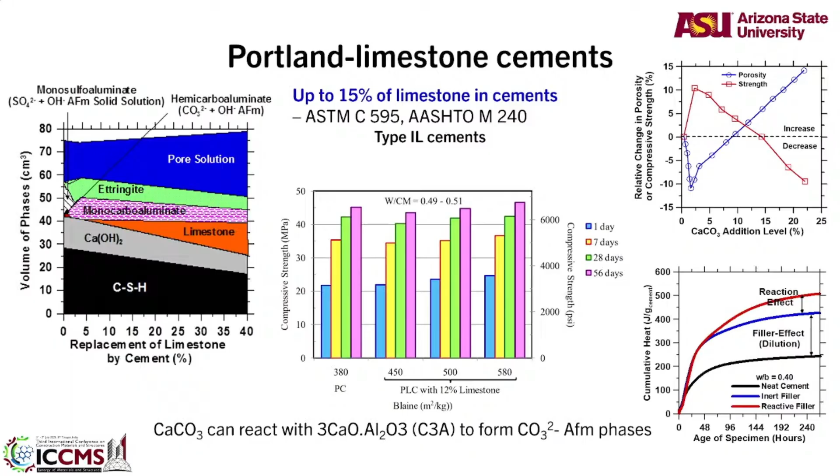In the US, we have what's called performance-based specifications for cement, so you don't have to do chemical composition matching all the time. You can do performance-based standards - ASTM C595 and C1157 are the two performance-based standards based on performance. What do you want - 40 megapascal strength at this time? Get it, move on, make sure nothing else happens. So that's why these cements are now much more common. Here are two cement plants, just an example.

This is a Portland cement plant in California and Ash Grove's plant somewhere in Missouri, I think. These two plants have completely converted to Portland limestone cement - they cannot make normal OPC anymore, even if they want, without changing their processes. So about 10 to 15% emission reduction translates into, if you're making 1 million tons of cement, about 100,000 tons of CO2 reduction every year.

There are lots of concrete paving projects in the US. Concrete pavements are the biggest consumers of concrete, then bridges - buildings are a very small fraction generally. There are lots of paving projects happening, and I'm showing the one in Utah because Utah is cold, and they have done this with resistance against freezing and thawing, resistance against salt scaling, all of those durability criteria you may normally have problems with.

If you look at the Portland Cement Association, which is now called the American Cement Association - because we are all about Make in America and Make America Great Again - they are now using a lot of educational items about improving Portland limestone cements and how that can be implemented.

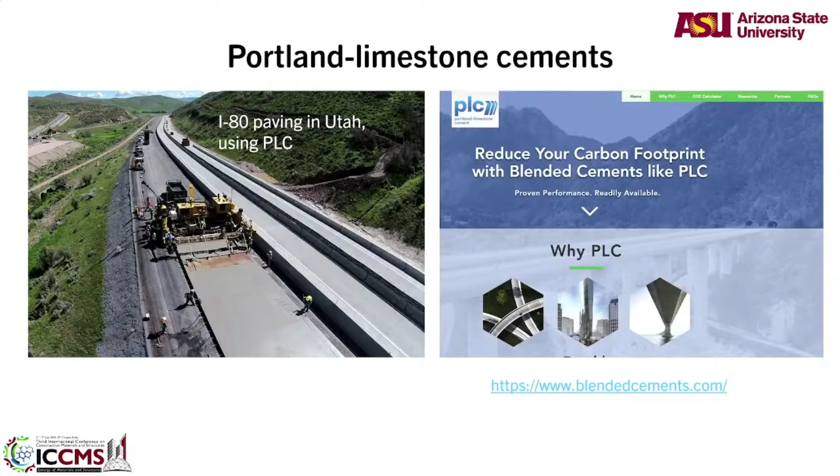Like I said, limestone is very good if you can make it react with some reactive aluminates. Cement has some aluminate, right? C3A - if you've ever looked at a mill certificate of cement, you'll see something called tricalcium aluminate. So cement has some aluminate which the carbonate can react with to form carboaluminates - carbonate and aluminates, no much fancy naming there. You can form carboaluminates, and these can increase your strength a little bit, increase your solid formation, solid products, increase your strength.

And if you look at it here, you have pretty much reduced 50% of your clinker - that's a massive reduction in terms of cement.

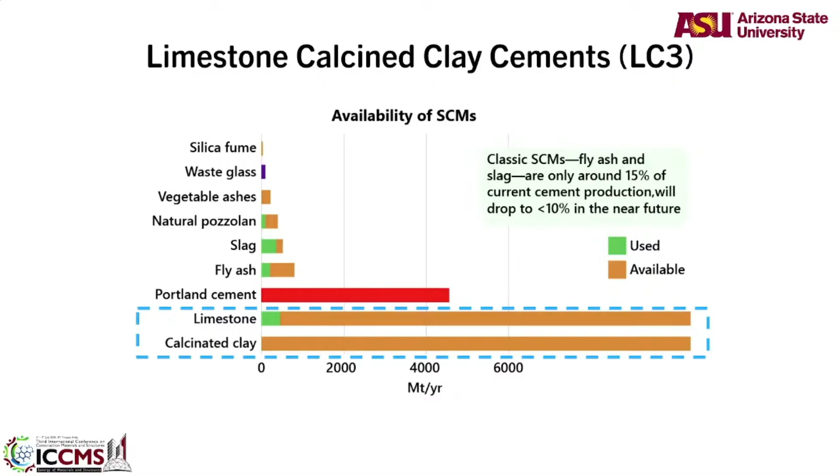This also talks about availability. Like I said, in the US, fly ash is not available much - this is the scenario we have. Silica fume, very little. Natural pozzolans, not much. Slag and fly ash, also very little. Plenty of Portland cement. But look at limestone, look at calcined clays - plenty of clays available. That could be slightly different in the Indian scenario because you don't want to take clays out of agricultural land and spoil agriculture in the name of making cement - that's a bad strategy. But if you have low grade clays, waste materials that are aluminosilicates, definitely you can use it. In the US, lots of farmers get money not to cultivate, just leave their plot empty so the government gives them money rather than further subsidies. So there's plenty of land and plenty of clay available to mine, which companies are efficiently utilizing now.

So this is your typical Portland cement, and this is your calcined clay. When you get to here, you have no CO2 from gypsum, no CO2 from limestone, a little bit of CO2 from calcining the clay, but you save a lot of clinker - you save all of these. So there's lots of CO2 saved compared to OPC. That's the idea, that's the strategy.

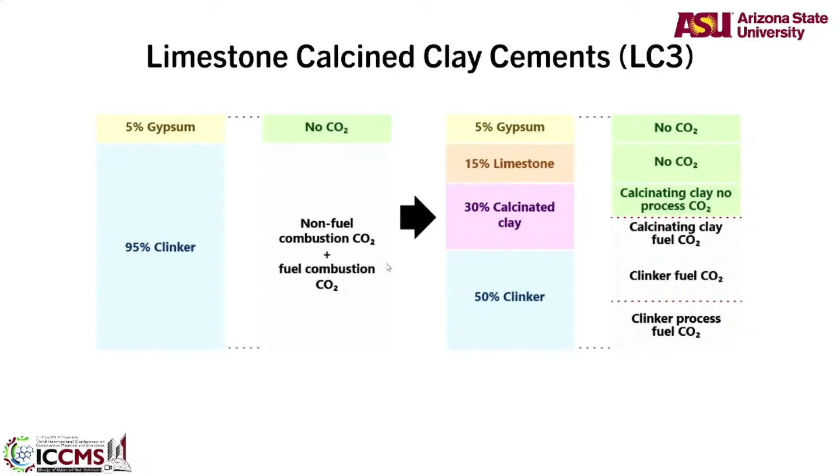So with ternary blends, LC3 systems, one of the biggest problems is very low early age strength - at 1 day, 3 days, you get very low strengths if you don't play around with it. So the strategy we're looking at, and some new stuff we're exploring, is how do we do it?

Can we co-calcine limestone and clay? Companies are trying to do that - can you put some limestone and clay together? What happens is you calcine the clay completely, that's about 600 degrees Celsius. Your limestone needs to get to 900, so at 600, limestone is only a little bit calcined. When you get a little bit of calcination around the carbonate grains, you get a little bit of calcium oxide.

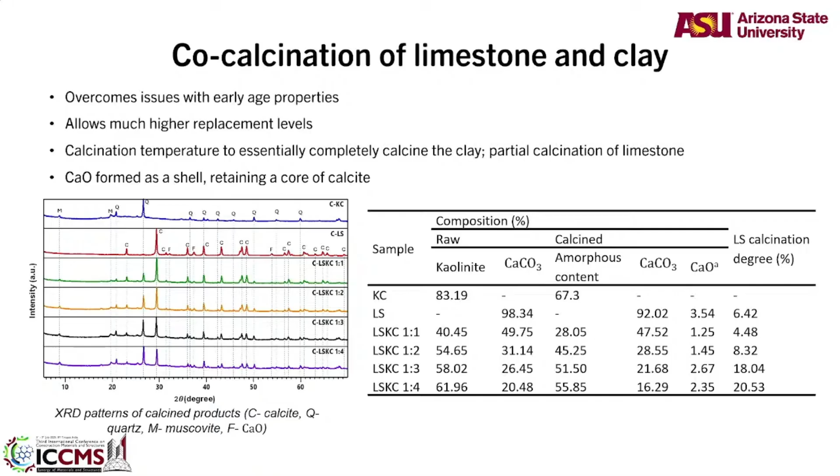And then you kickstart the reactions with that calcium oxide. You get very early strength. I'll show you the reactivity curves.

So what that does is you can now start to replace more cement. You're getting that extra strength, so you can replace more cement—up to about 70%, 75% of clinker can be replaced. Again, if clinker reduction is your strategy, you need that.

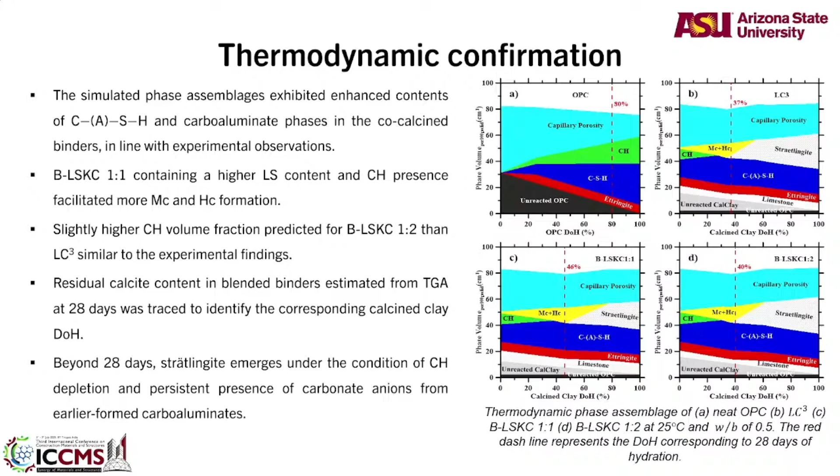Now, what does that do with admixtures? Wonderful story—if you're an admixture manufacturer, you will be very happy because it will need a lot of admixtures to do that. The other story is how do you activate clays?

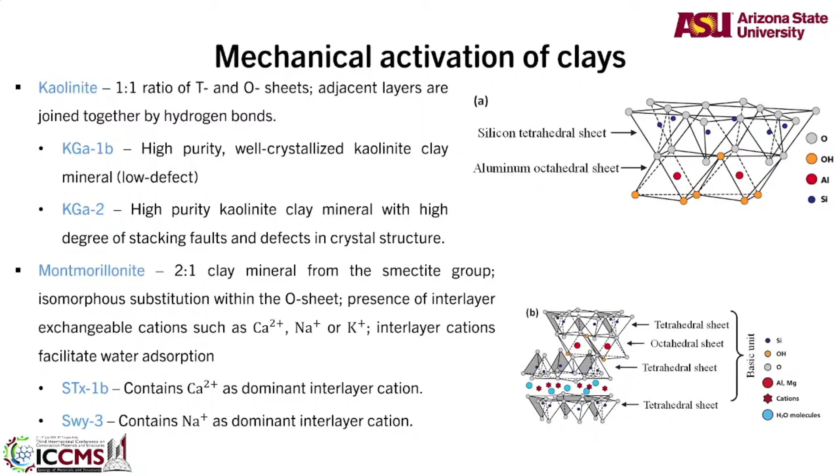Clays are not normally very reactive because they have these tetrahedral sheets of silica and octahedral sheets of alumina that are very happy with each other. They don't want to do anything. So how do we make them react faster? You can really grind them, mechanically grind them, break them into much finer crystal structure levels, and create much more reactivity.

So again, simple processing techniques—not simple in the sense that manufacturers can do it fairly easily, but processing techniques to make things better. I'll skip the NMR structure detail, but essentially alumina goes from 6 coordination, which doesn't do anything, to 4 coordination, which is very reactive—4 oxygen with alumina rather than 6 oxygen with alumina.

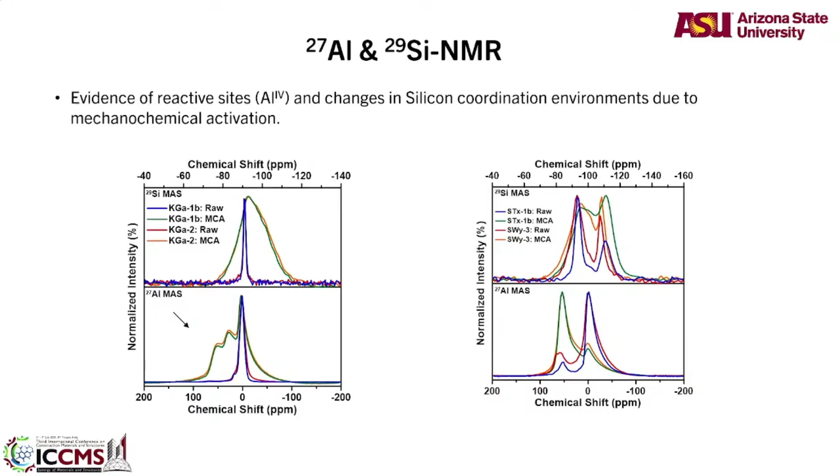But what are the other options? You can carbonate cements—make cements carbonate and absorb some CO2 that way. You can use fly ash to carbonate stuff very well. Those working with alkali-activated cements will carbonate even more.

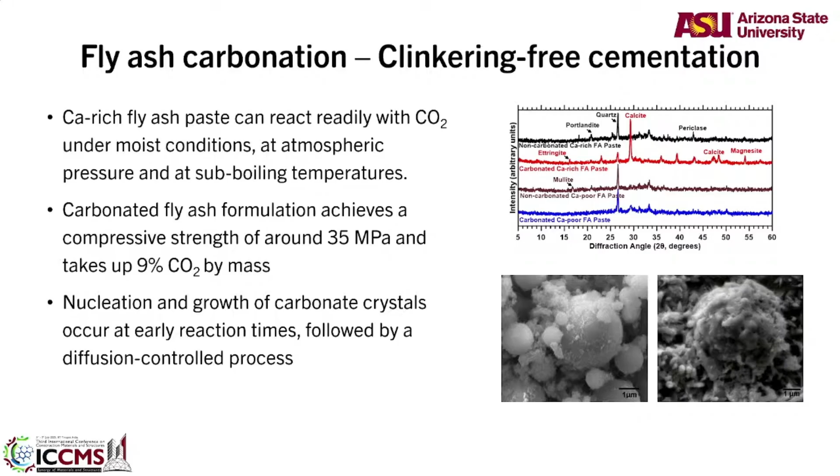Don't ask me if carbonation is a problem here—that's a totally different story. For this, carbonation is different from the carbonation in concrete that causes steel corrosion. That's a different story, but you can create carbonated products. You can mineralize it too. But I've talked quickly.

Venkatesh, how much time do I have? Five minutes? You have about five minutes. Very nice, that's what I planned.

So, quickly talked about some low carbon alternate manufacturing methods. If all of these clinker reduction strategies are great, can cement companies think about reimagining manufacturing of cement? That's some of those things we are working on now. Can we completely reimagine cement manufacturing? Can we think about ways to make cement differently with almost no CO2?

Sound like science fiction? Kind of, right? But I'll show you a few options to do it. It still is science, for sure. Fiction, I'm not so sure.

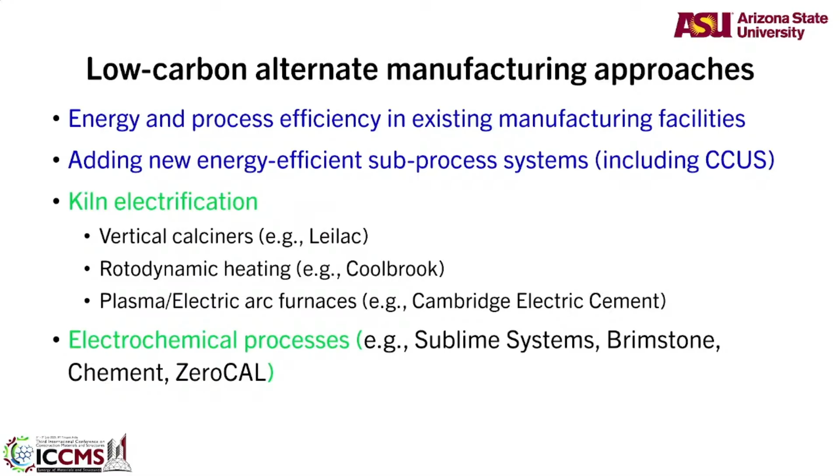We'll see that. So you can do electrical calcining—1200 degrees, electricity can help you calcine. If that electricity is provided by a renewable source, that calcination becomes carbon free. Now I'll show you a few ways you can tweak this whole process, and there is plasma as well.

But if you do an electrified calciner or kiln, you take this fuel emission off completely. You have lots of electricity need, but this process emission is gone completely, assuming—now that's key here—if I calcine limestone alone, I get pure CO2, correct? Whereas in current cement manufacturing, you're getting CO2 mixed with a lot of other gases that is very difficult to separate. And if I do an electrochemical process, I have no process emissions.

I'm not even breaking calcium carbonate into CO2 at all. Let me show you one slide on that. Here is one way of doing it: you have an electrically heated calciner, meaning limestone is calcined by itself, not as a raw meal with everything, just limestone heated. This means you get pure CO2 that you can take off and sequester or do something else. Then you have the rotary kiln.

Here you start mixing the remaining things and create it. Your pure CO2 can be captured, and you can integrate it with CCUS methods. You can co-locate it with a facility that needs CO2 as a raw material, like chemicals—ethylene, acetylene, all of them need CO2. You can co-locate it, the CO2 gets used, and your cement comes out almost CO2 free. That's one option.

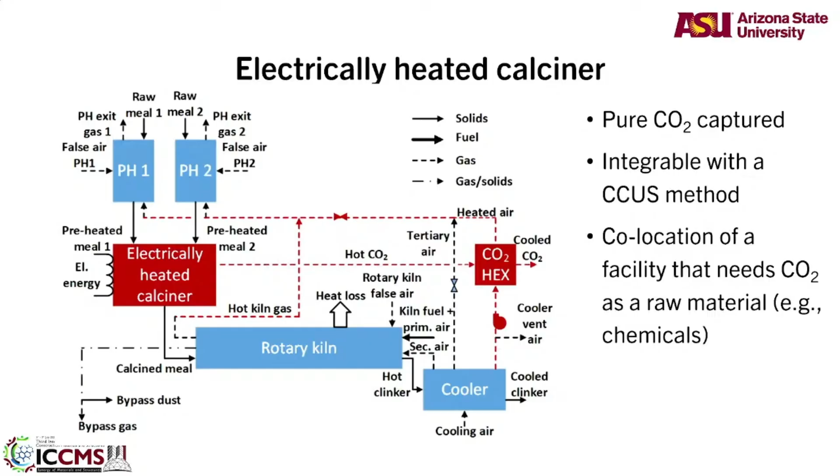The other option is electrochemical technologies. This is a little more into the fundamental science regime, where you start breaking calcium carbonate into calcium hydroxide—not calcium oxide, but calcium hydroxide—by electrochemistry.

This can be done in two or three different ways. You can do high temperature electrolysis using molten salts, room temperature electrolysis, or recycling in seawater where you do ion exchange. There are multiple ways of doing it, but all electrolysis methods essentially create only calcium hydroxide.

With that, you have to fuse silica and alumina. You need something else, and that something else typically is either a plasma or some other renewable technology, which I'm not talking about now for lack of time.

So the idea is, if you're looking at all cement reduction technologies, yes, clinker reduction is great—you should still do it, and stress it as much as possible. But if our infrastructure growth continues like this, there will come a time when clinker reduction also falls short. What do we do at that time? Some of these new technologies are the precursors we should look at to understand how we can completely reimagine the manufacturing of cement.

The advantage is that this chemistry and process allows you to manufacture many things together. Cement doesn't have to be a 500-acre plant with another 10,000 acres of limestone mine. You can actually make it much more portable because you don't really need a 50-meter, 100-meter long kiln. You can shorten this process completely.

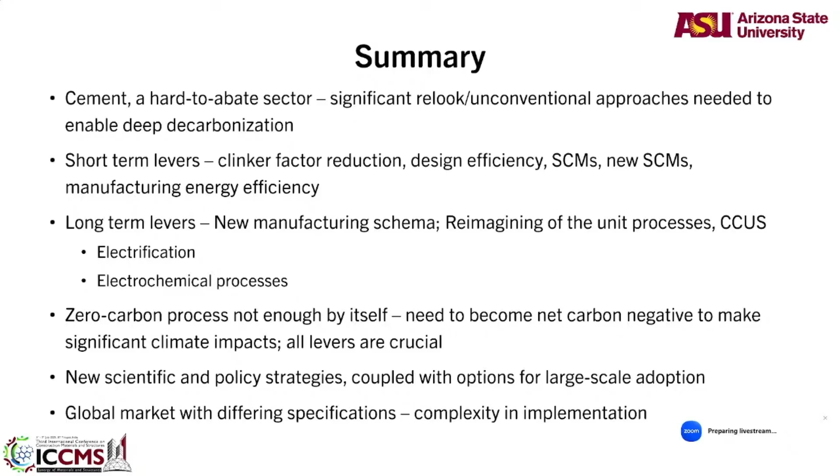In the US, we are actually starting some pilot plant work on electrochemical pilot plants. A company called Sublime Systems, if you look at it, is doing this. They are creating, I think, 100,000 tons of cement, or they plan to create 100,000 tons of electrochemical cement. So these technologies are coming.

Just to give you a preview of where materials are going towards sustainable structures—I want to emphasize that all the materials I talked about have exactly the same properties as conventional ordinary Portland cement or current materials, so your standards and specifications don't have to be changed. Because changing standards and specifications is a huge job; it'll pull us back further.

So the idea is to create the same material with a different manufacturing process. Therefore, the focus now is on manufacturing, because we know the chemistry, what kind of manufacturing systems will work, and what kind of technologies would be needed. Thank you very much, I think I'm on time.